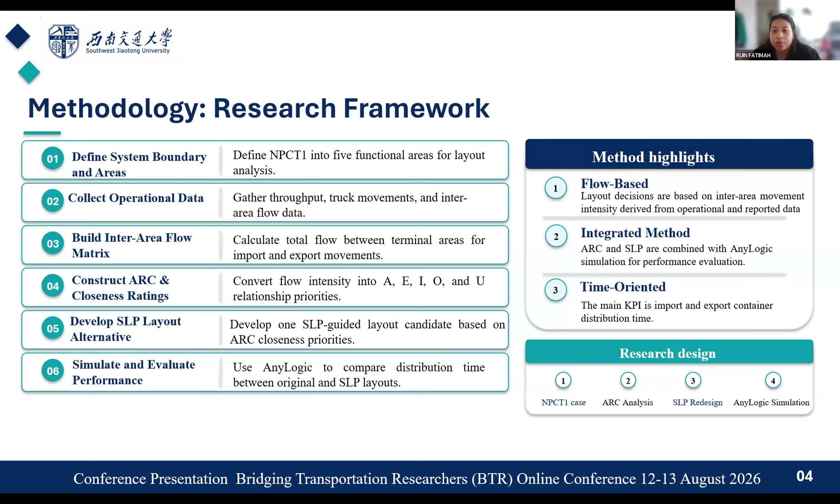The study focused on the terminal layout, inter-area movement, and time-based performance. It does not redesign the entire port system, but focuses on how the arrangement of key terminal areas can influence container movement.

This study has three contributions. First, the applied decision support contribution is the combination of flow-based ARC, SLP guide, and AnyLogic simulation into a traceable workflow.

This explains the analytic logic of the study. The process begins with operational flow data, including throughput data, truck trips, and inter-area flow in Jakarta Port. Then after we get the ARC, the important step is deciding the layout with logic.

In other words, the layout is not changed by intuition, but based on the strength of operational relationships.

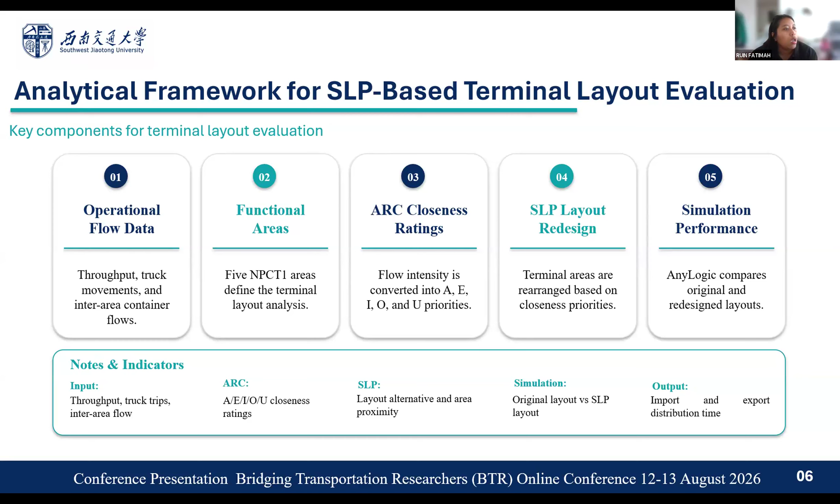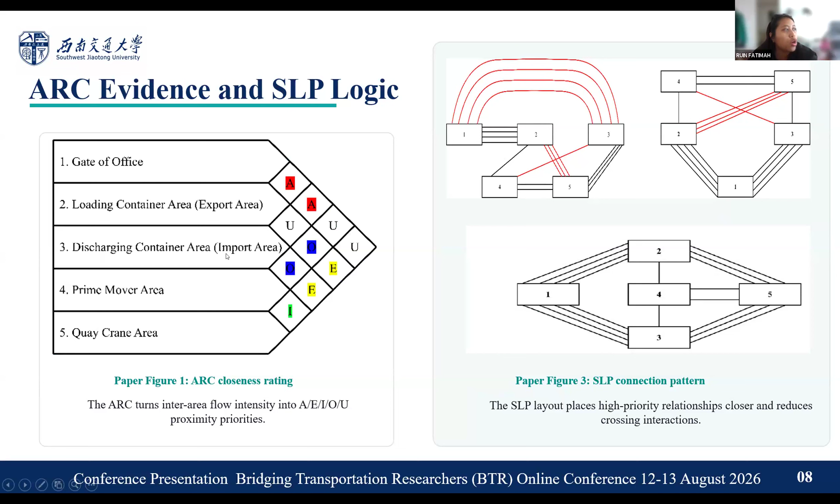Redesign aims to place high flow and high priority areas optimally. If we look at this, I have areas 1 through 5: 1 is the office, 2 is the export area, 3 is import, etc. For the prime mover area, this is simply about moving the prime mover area so we can see how distribution time becomes more efficient.

After I changed the layout from the original to SLP and applied it in AnyLogic, we can see the distribution time from the original layout. For import, they made a reduction of 18.85%. Also for export, this was 33.6%.

This result indicates that the redesigned layout can improve time-based terminal performance. The improvement is stronger for export movement, which suggests that export flow may be more sensitive to spatial arrangement in this case.

So this is the discussion. The findings have several practical implications, but these should be interpreted as case-specific results rather than a general prescription for all terminals. Operationally, the SLP layout helps improve proximity between high flow areas.

This can reduce unnecessary internal movement and support smoother container distribution. From a managerial perspective, the framework can support evidence-based decision-making for terminal managers using operational flow data, ARC analysis, and SLP redesign. This study also has wider relevance for terminal planning, port, and development.

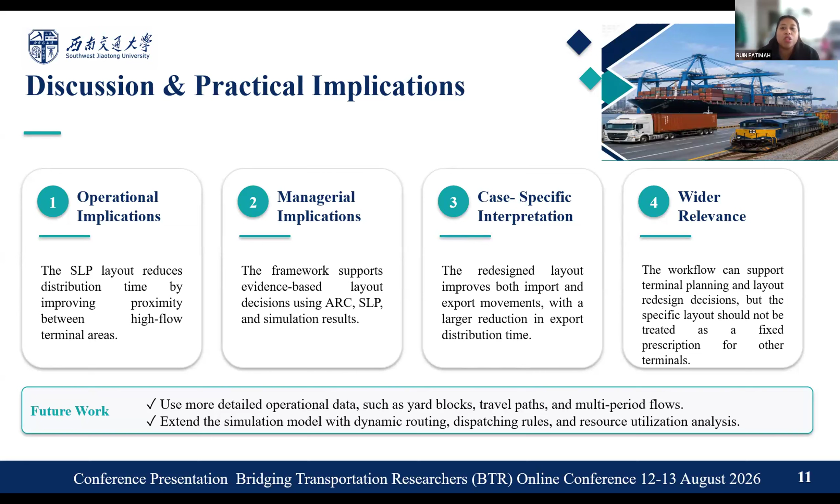However, future research can improve the model by using more detailed operational data, such as yard blocks, actual travel path, and multi-period flow data.

To conclude, this study integrates ARC, systematic layout planning, and AnyLogic simulation to evaluate redesign at Jakarta Port. The results show the SLP developed layout can reduce distribution time.

For import it is 18.85%, and for export 33.6%. This suggests layout planning can provide practical decision support for terminals, while the redesigned layout should be understood as one improved candidate, because the case study is just in Jakarta Port, we cannot say it will work the same in other terminals.

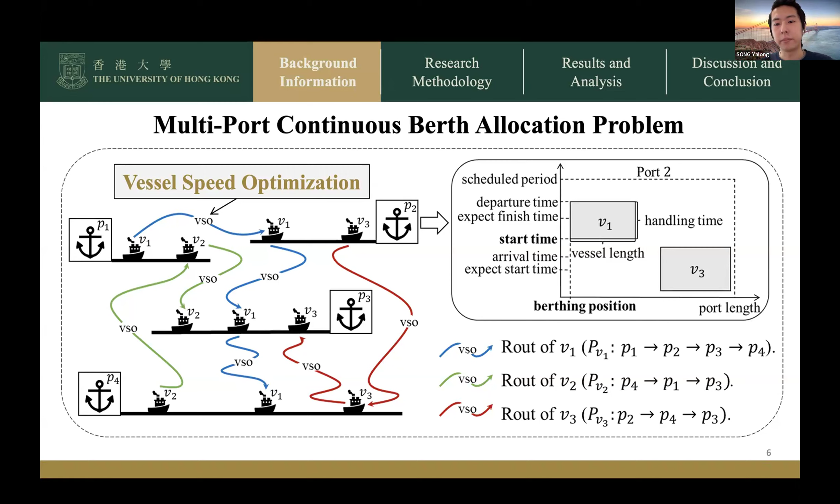I also follow some assumptions in this work. First, we assume the handling time is fixed as a parameter. Second, we consider the hard operation start time window as well as the soft operation end time window. The delay will incur penalties, which will further reflect in the objective.

Third, we consider the discretization of the speeds. All the vessel speed optimization will select a speed in a given range. Finally, the safety margins and the draft depths are assumed to be satisfied.

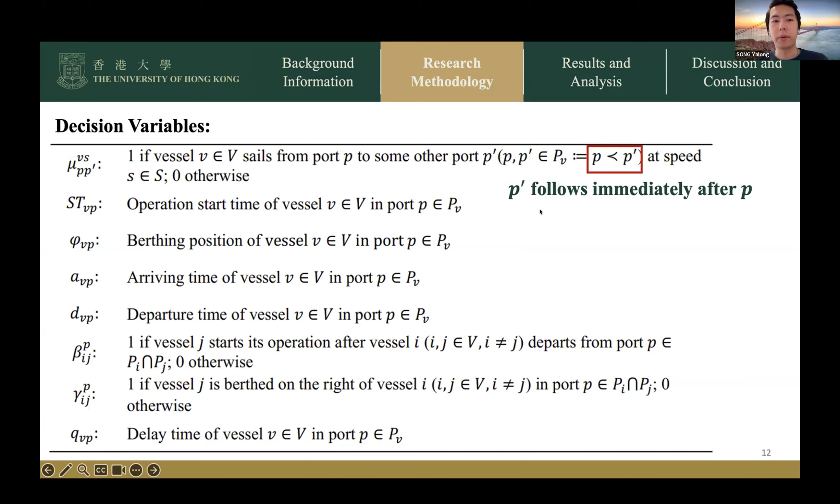Based on these problem descriptions, we propose some methodology here. Here are some size parameters and decision variables used in the formulation. We just quickly see them, and the symbol of precedence means the port P prime follows immediately after port P, which will be used in the following model.

We formulate this problem as a mixed integer linear programming model. The objective is to minimize the cost for the whole system, which includes three parts: the vessel waiting cost, the penalty for delay, and the fuel consumption.

For the constraints, 2 to 5 are relevant to the vessel time windows, and constraints 6 to 8 prevent any two vessels from having conflicts in the same port.

We also give a diagram to show the expression for these constraints. The beta and the gamma are decision variables for the temporal and spatial relationships between any two vessels.

We allow at most one overlap in either space or time, just like the situations shown in picture A and picture B. Both of them are feasible. However, in picture C, if we cannot define any gap in both space and time, this means that there is an overlap between the two vessels, and all the decision variables must be 0.

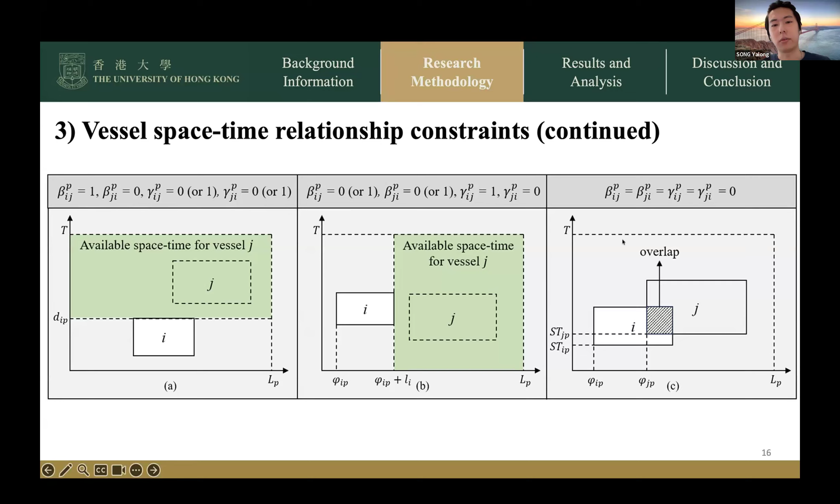Constraint 9 further ensures the vessel berths inside the ports, and constraints 10 to 12 ensure operation continuity in time, where constraint 12 assumes that the speeds between any two ports are constant. The last one, the scheduling period constraint, ensures the end time for each vessel must be before the scheduled period.

The removal and insertion operators are designed according to the problem characteristics. Moreover, we also introduced a neighborhood solution generation operation to explore broader neighborhoods for the solutions.

In this algorithm, we also consider a constraint relaxation mechanism. We first relax constraint 13, which is the scheduling period constraint, in the initial solution generation, and further reprocess the violations in the removal operation.

We also relax constraints 6 to 8, which are the non-overlapping constraints, in the insertion operation, and finally remove the conflicts caused by the relaxation in the newly introduced neighborhood solution generation operation. Finally, we can get a new feasible solution. That's all of the framework of the ALNS algorithm.

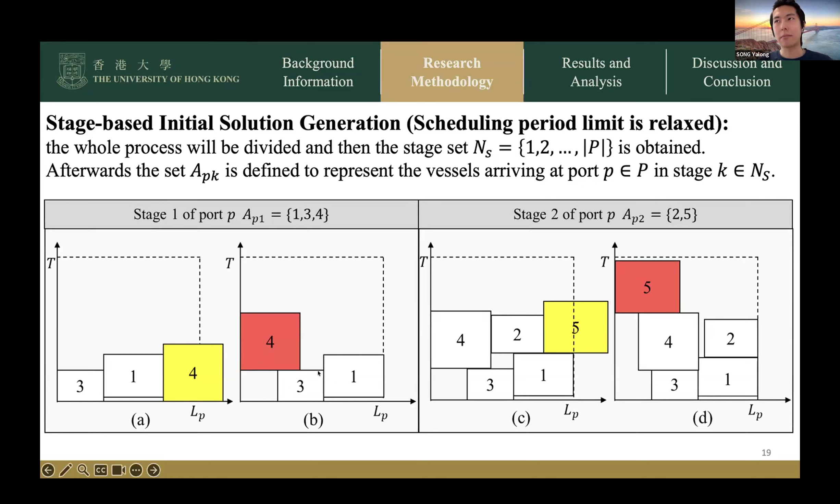As shown in picture A, once a vessel exceeds the port length, we mark and remove it temporarily, and further push out the unmarked vessel to the rightmost positions in this port, like picture B, and reallocate the marked vessel to the leftmost position in this port, as well as postponing the start time of the vessel to avoid any conflicts with other vessels. This is the steps for the stage. Repeat these steps in each stage, and we can get an initial solution.

In case we relax the scheduling period constraint in the initial solution generation, we need to remove the violated vessels in the removal operation first, and the others are removed according to the selected operators as follows, including the random remove, bit-based remove, cell-based remove, and delay-based remove. The second and third ones follow the criteria about the waiting cost and average speed.

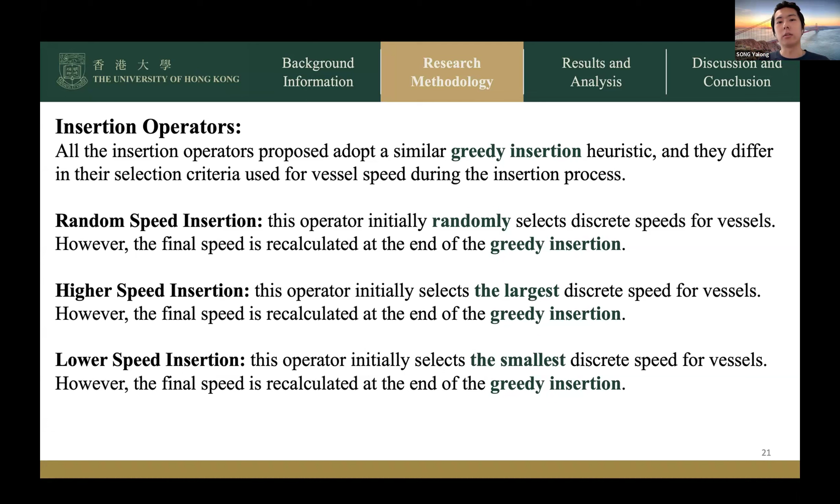We repair it in the insertion operation. We propose 3 operators to decide the initial speed for the vessels to insert, including the random speed, higher speed, and lower speed insertion operators. After deciding the initial speed of each vessel, we can calculate the arrival time of the vessel at the current port, and we apply the similar greedy insertion heuristic to get the assignment for the vessel. After that, we recalculate the actual speed for the vessel according to the results of the assignment. I will show the greedy insertion heuristic using the example below.

We try to insert the vessel v, marked in yellow, into the current plan in this part. We first calculate the arrival time of vessel v based on the selected operator, and considering the expected start time of vessel v, we can define the earliest start time of vessel v, which is the value of the red line min. This value plus the handling time gives us the value of max. These two red lines bound the insertion period for this vessel, and we mark the vessel operating within this period in blue, and further eliminate the spaces occupied by these marked vessels to get the green areas, which are the available areas for insertion, like picture A.

In picture B, we shift this period and can find a feasible position for the vessel to insert, like picture C. We try to insert all the vessels into a feasible position. However, when no strict feasible region can be found, the vessel will be put on the position that doesn't exceed the scheduled period and has the minimal conflict with other vessels. This is because we relax the non-overlapping constraints in the insertion, as I talked about before, and the conflicts will be further eliminated in the next process.

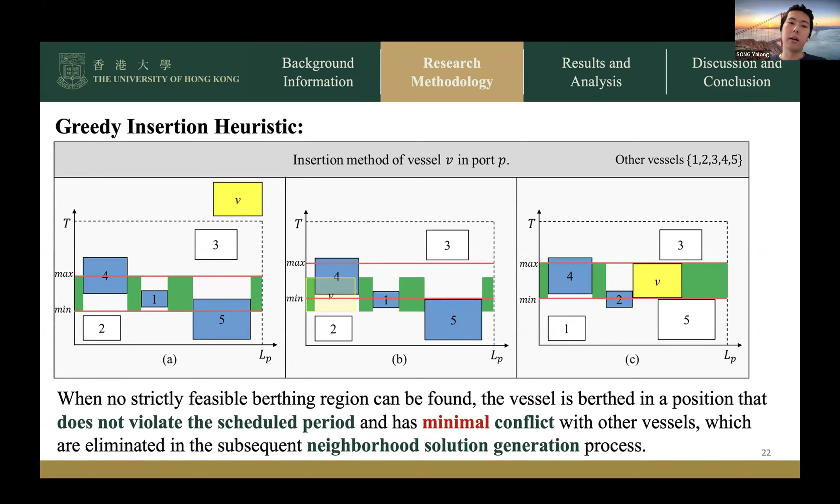We first push vessel 1 to the right to eliminate the overlap. If it's feasible, we end the operator. However, if vessel 1 exceeds the port length, we then push it up to find a feasible position. This is the meaning of the sequence of the 2 movements in each operator.

We need to eliminate all the overlaps caused by the relaxation in the insertion operation, and then we can get a feasible solution. Okay, that's all of the key procedures in the proposed algorithm. We further show some numerical experiment results.

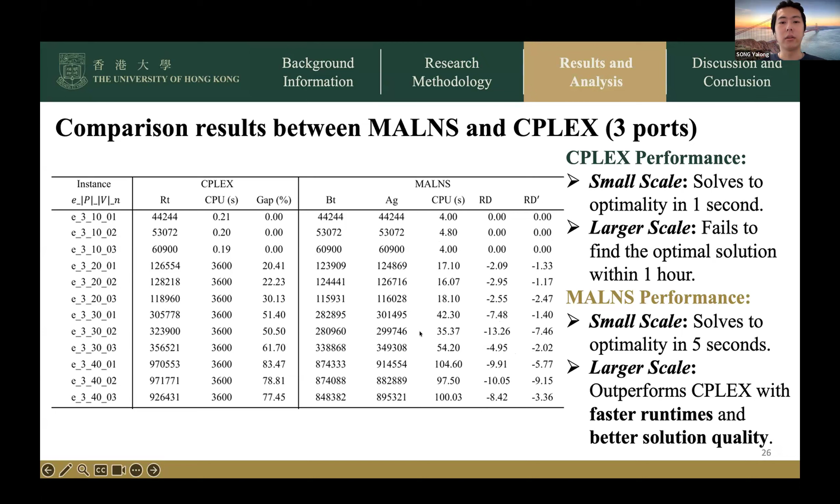By contrast, the MALNS outperforms CPLEX with larger scale instances regarding a faster runtime and better solution quality, which are shown in the last 3 columns in this table. We run MALNS 30 times for each instance, and the average solution and solving time are the average values for the 30 results. And then here are the results for the instance with 4 ports.

These instances cover a broader range of vessel numbers. For the small and medium scale instances with 10 to 70 vessels, we can get the same conclusion as the instance with three ports. For the large-scale instances with 80 and 90 vessels, CPLEX cannot find any feasible solution within 1 hour.

By contrast, the MALNS also can get the feasible solution within a reasonable solving time, from 5 minutes to 7 minutes. Okay, that's all of the main contents of this paper, and we will give some discussion.

For the limitations of this paper, we just consider a deterministic scenario, including the handling times and the sailing conditions. We also assume a strong cooperation among parties involved in the maritime transportation, which may be challenging in practice. And we also consider a constant sailing speed, ignoring the real-time dynamic adjustments of the speed.

For the future work, the future work can incorporate uncertainty for this problem by applying stochastic or dynamic programming. And it's also worth exploring the enhanced heuristic with advanced strategies.

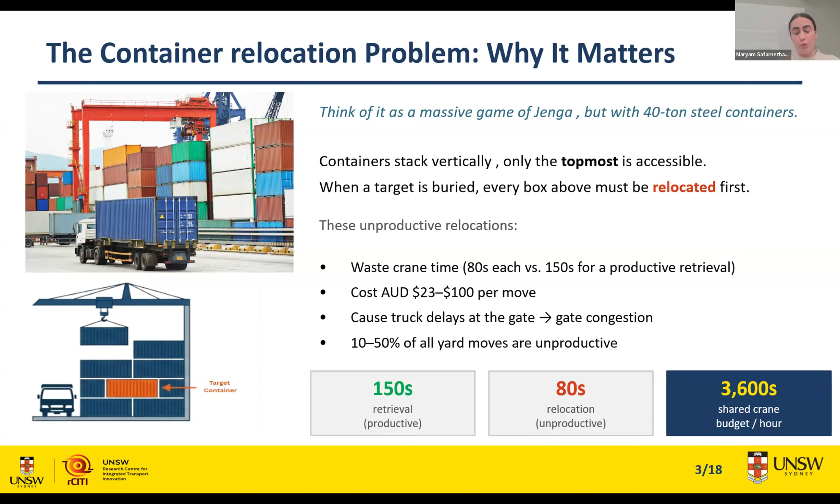So the container relocation problem basically tries to answer this simple question: how can we retrieve all containers while minimizing the number of relocations, basically focusing on crane efficiency? Traditionally, this problem is approached as a single objective problem, and it's proven to be NP-hard.

But if you look at container movement operations, we can understand that container retrieval and truck arrivals are interconnected. So focusing on one of them solely would lead to suboptimal decisions. On one hand, we have port operators who want to maximize crane efficiency, so they might wait until something called natural exposure of the container, which means longer delays for some trucks.

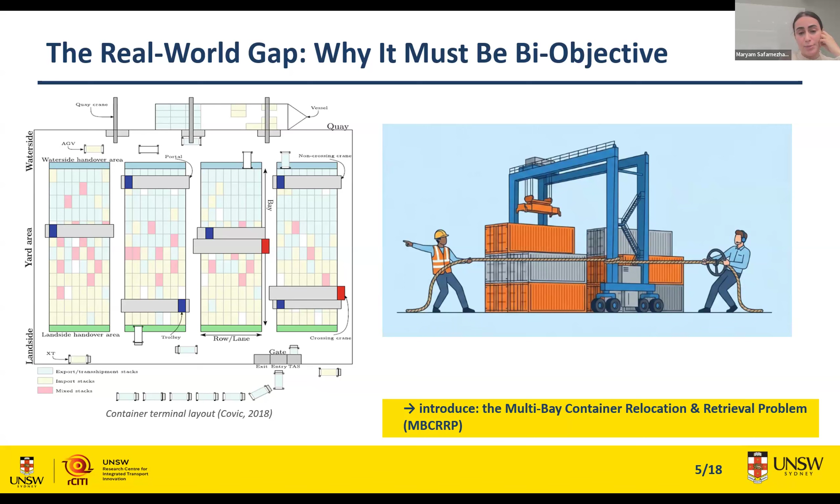On the other hand, are truck companies whose trucks cannot wait for a long time. But if we only focus on service level for the trucks, then the yard might have to do so many relocations. So these are basically two conflicting objectives, and that's why in my research I focus on joint optimization, trying to minimize crane movement, or relocations, while also minimizing the deviation from the schedule for the trucks at the same time.

So they have to solve each problem instance from scratch, and obviously that's not applicable in a highly dynamic environment of container terminals. That's why there has been a growing shift toward learning-based approaches and basically reinforcement learning. But as far as we're concerned, there hasn't been any work considering bi-objective CRP and applying multi-objective reinforcement learning on that. So that leads us to a clear gap, and that's the framework that my research would address.

But why choosing reinforcement learning? Reinforcement learning is a very good fit for sequential decision-making problems, and CRP is inherently a sequential decision problem. So every action and decision that we make now would actually affect future actions.

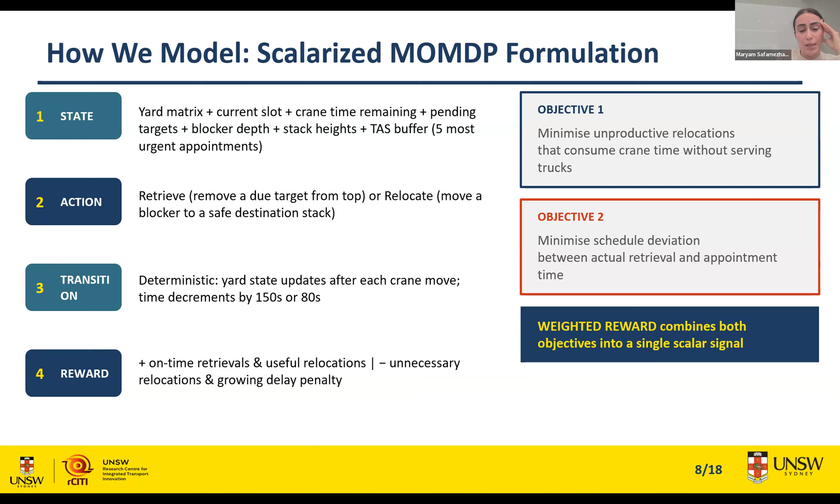In order to factor in the truck appointment schedules, I've used two priority labels. The first one is static priority labels: 0 for overdue containers from the previous day, 1 for targets planned to leave today, and 2+ for future stock. We also have a dynamic priority label that would change based on the remaining time to retrieval. This gives a general vocabulary for the agent to use based on different yard configurations, and also gives the agent the information needed on when to retrieve a container.

Standard Q-learning uses a limited time horizon, but here I'm using a rolling horizon training. The reason I'm doing this is that I want the agent to not only think about today's decisions, but also about the next day. So all the base features and state would be carried over to the next day, and that lets the agent have the freedom to learn a policy where, when the crane is idle, it actually does some pre-marshalling and prepares the yard for the next stage.

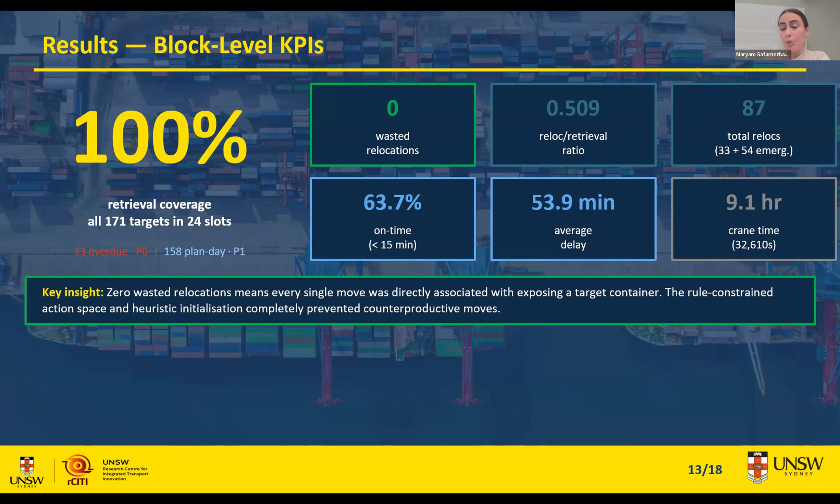After the agent is trained and learns a good policy, we evaluated its performance on unseen snapshots. As you can see, 100% coverage rate means all 171 target containers are retrieved, and we have a 0.5 relocation-to-retrieval ratio. So for every 2 retrievals, there's only 1 relocation, and 63% of all these target containers are retrieved on time, with an average delay of 53 minutes.

What that means for us is that multi-bay coordination is very complex compared to what we see in literature with single bay. That's why I also tried to consider multi-bay, because first of all it's closer to reality, and also having one crane shared between different bays makes the answers more optimal, not sub-optimal.

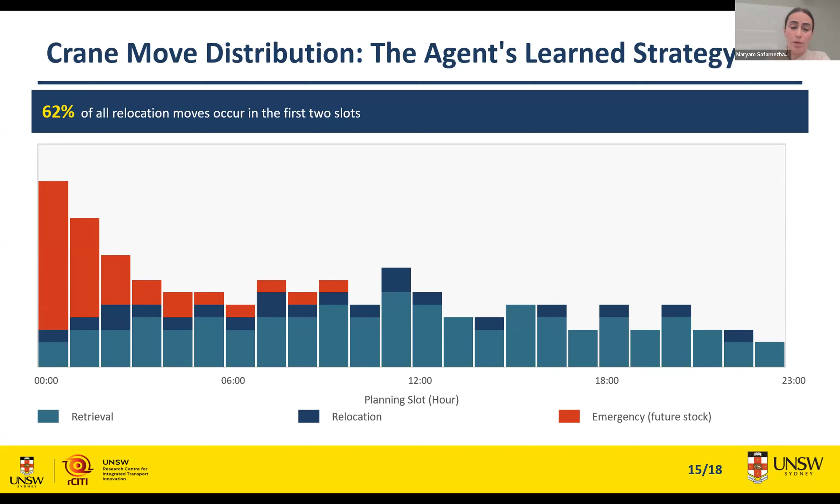If we look at this bar chart of crane movement distribution, we can see the agent actually learns a good policy. 62% of all relocations happen in the first 2 time slots. This tells us the agent learned to relocate the blockers early when it has idle time in the night shifts, and then focus on retrieval as the day progresses. So clean early and retrieve all day is the policy the agent learned, and that's what we expected.

So what this result tells us is that 100% coverage rate and 0.5 relocation-to-retrieval ratio show that the agent is trained and the heuristics are doing their work. But we have only 63% on-time retrieval.

One reason for this is related to the one crane being shared between multiple bays. The other is that we are trying to extract very specific features from the yard to show the agent how to make more generalized decisions and apply them to different yard configurations. But because of the limitations of tabular Q-learning, the Q-hit rate is not very high—here it's about 51%. Other times it falls back into the heuristic.

That's why in future steps I'm looking to replace tabular Q-learning with deep reinforcement learning, which would be better suited for the larger state space and could also make more general decisions. Thank you everyone for listening, and I'm happy to answer any questions.

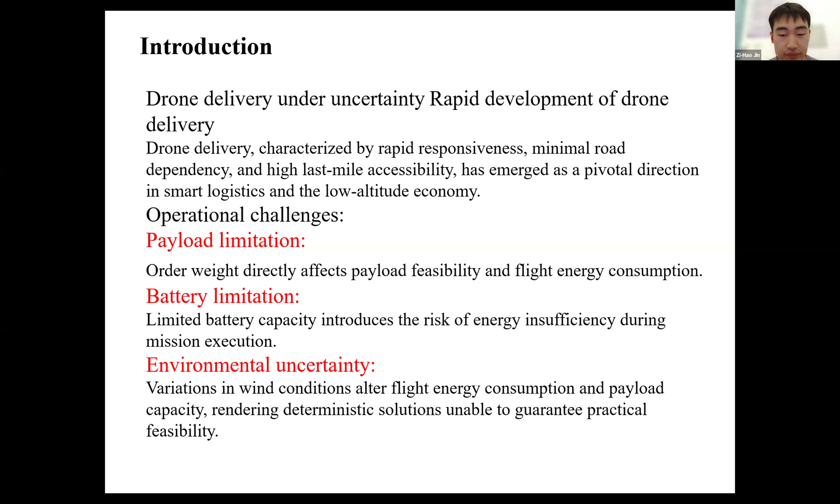And how to ensure reliable drone delivery decisions under uncertain payload and windy conditions.

In this system, there are a depot and some drones. Drones depart from the distribution center, return to the depot after serving customers, and then proceed to the next mission and battery replacement.

Therefore, the objective of the paper is to design a reliable drone delivery scheduling strategy under uncertainty, minimizing system operating costs while ensuring robust feasibility of the solution. We want to develop a reliable drone delivery scheduling strategy that minimizes operational costs while maintaining feasibility under uncertain payload and windy conditions.

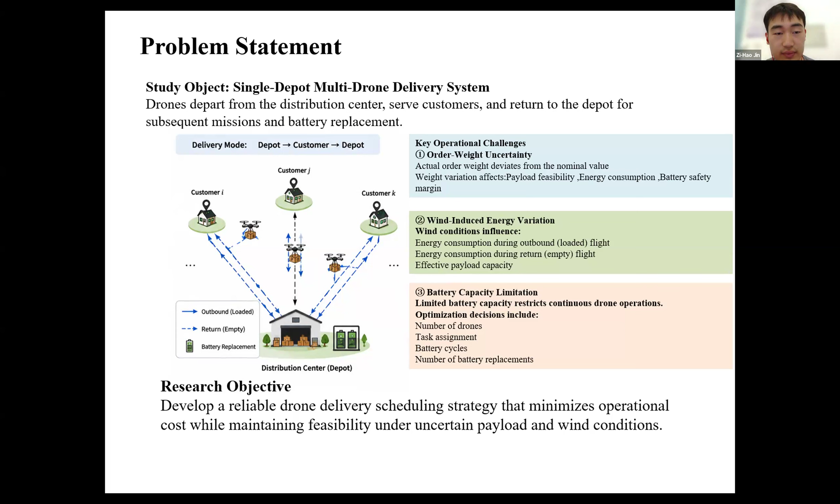And I will now introduce the robust optimization model established in this paper. Due to the presence of order weight fluctuation and windy condition variance in drone delivery, if we directly adopted a deterministic model that only considers predicted weights and average environmental conditions, two problems will arise in actual operations: increased order weight may cause the drone to exceed its maximum payload, and actual energy consumption may exceed the predicted value, resulting in insufficient battery power during flight. Therefore, this paper proposes robust optimization to explicitly incorporate uncertain factors into the model.

The overall model adopts the classical two-level min-max robust optimization structure. This formula consists of two optimization levels. In the outer layer, the decision maker performs the system planning: decides which drones to activate, which drone serves each customer, which battery cycle to use, and how many battery swaps are needed. In short, the outer level answers how the system should plan delivery schemes in advance, considering future uncertainties.

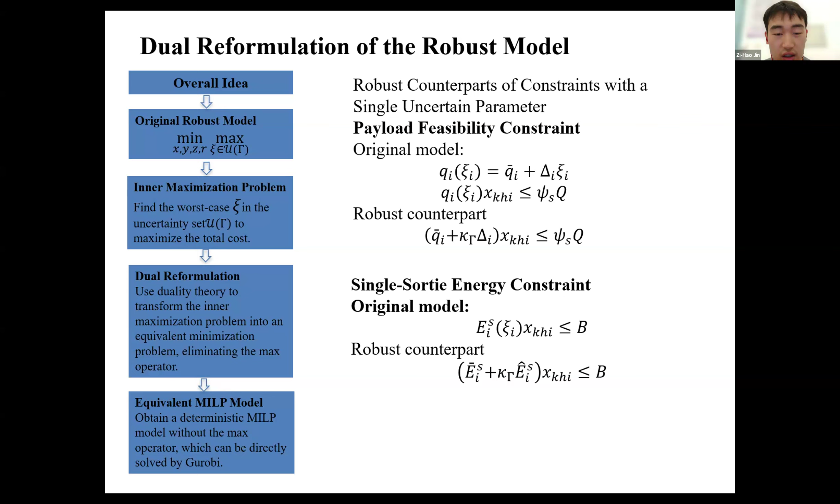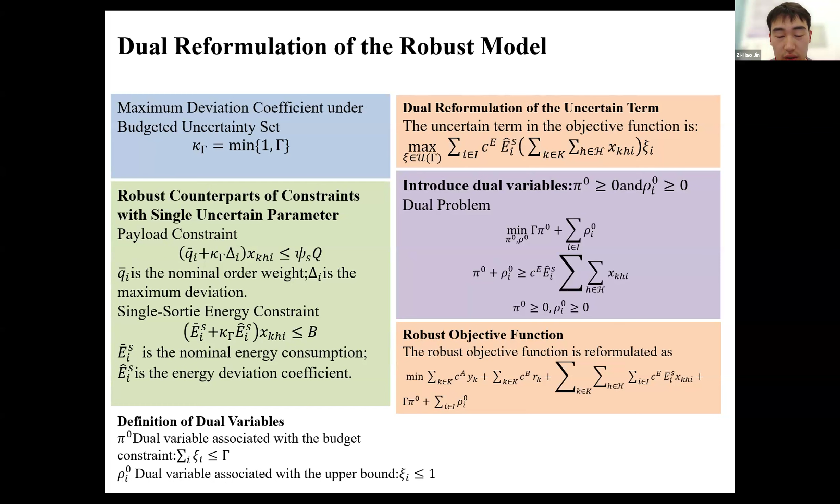And the objective now becomes deterministic, no longer contains max, and can be directly solved by Gurobi. And finally, for the complete energy constraint, we get the origin uncertain term converted to this dual problem, which can also be directly solved by Gurobi.

I will now present the experimental results. First, the experimental environment and parameter settings, then cost variations under different robustness levels and out-of-sample relative performance. The experiments verify two questions.

Can robust optimization improve reliability under uncertainty? Is the additional cost acceptable?

We set the robustness budget setting to five numbers. As gamma increases, the model considers more disruptions, improving reliability but increasing objective cost due to more energy and battery swap resources.

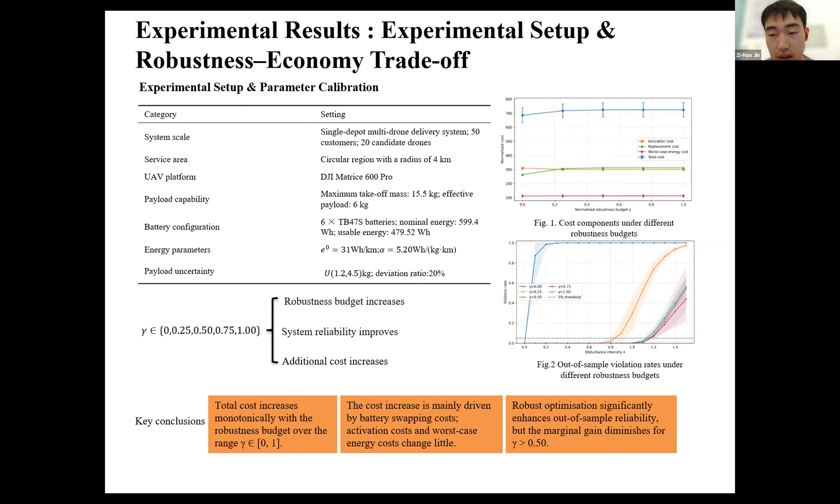After determining a reasonable robustness level, this section further analyzes the impact of two main uncertain factors: order weight uncertainty and wind condition variation on system goals.

713. Cost increase mainly comes from additional battery swap demand, because heavier orders lead to higher flight energy use, lower remaining capacity, and more frequent swaps.

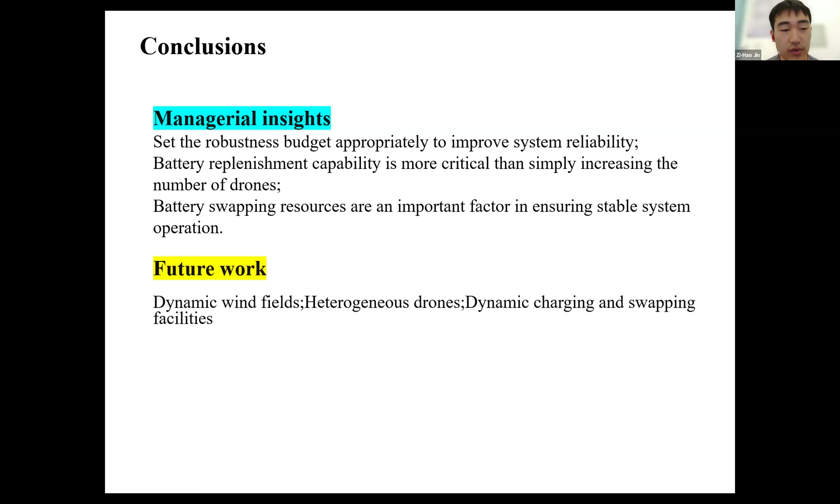Future work should consider dynamic wind fields, heterogeneous drones, or dynamic charging and swapping facilities. Thank you for your attention.

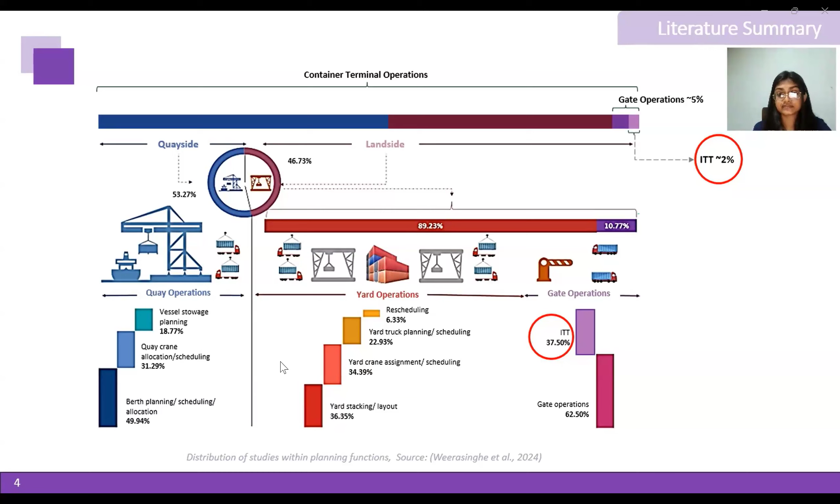Based on the literature review, we identified two main research gaps and objectives. The first research gap is the lack of system-level representation of ITT automation. Existing research has mainly focused on automation at individual terminals or specific technological and operational aspects. Although interterminal trucking is recognized as an important part of port operations, there is still limited understanding of ITT automation from a multi-terminal system perspective. Especially the key variables influencing automation and the causal relationship among them have not been systematically represented. Therefore, there is a need to identify these variables and understand how they collectively influence ITT automation. So based on this first research gap, I developed my first research objective: to identify the key variables and causal relationships governing ITT automation within a multi-terminal port system.

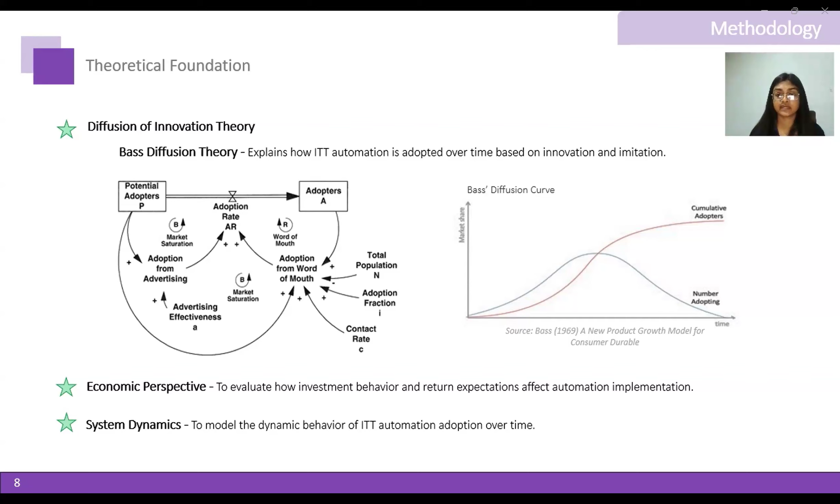This is the data collection part. We use secondary data sources such as peer-reviewed academic literature, industry reports, and publicly available data to develop the causal loop diagram and identify key variables. We also use expert insights, interviewing several experts from the Port of Colombo to help develop and validate the causal loop diagram.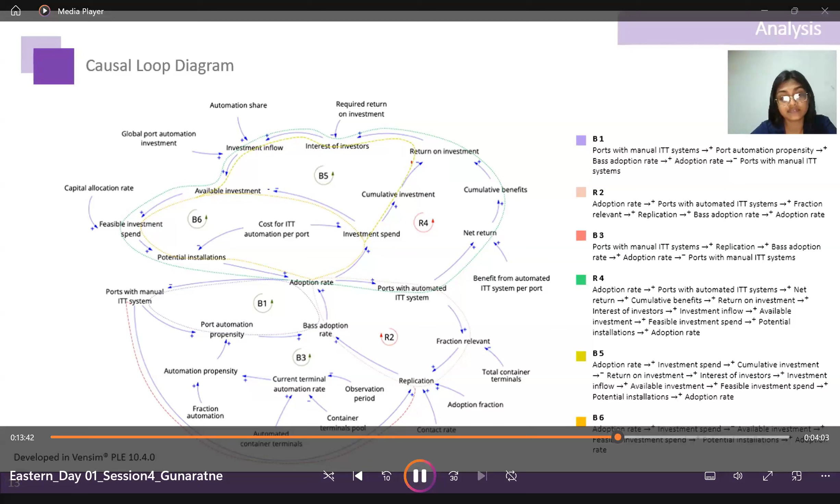If we take the R4 loop, it is also a reinforcing loop, which introduces the economic side of the model. When ports adopt automation, they can achieve operational benefits such as improved efficiency and lower operating cost. These benefits can improve the return on investment, and a better return makes automation more attractive to investors, increasing investment inflow. When more investment becomes available, more ports can implement automation, so again we have a reinforcing effect.

If we take the B6 loop, it is a balancing loop representing the investment capacity constraint. Automation requires financial resources, so as more ports adopt automation, more of the available investment capacity is used. As the remaining investment capacity decreases, fewer additional automation projects can be supported, which slows down the adoption rate. This is essentially a resource constraint: adoption requires investment, but investment capacity is not unlimited. So we can see that ITT automation is not a linear process; there are forces pushing adoption forward and forces that slow it down.

Here you can see the stock and flow diagram we developed. Basically, the stock and flow diagram converts these relationships into a simulatable structure. We have two main stocks, ports with manual ITT systems and ports with automated ITT systems, linked through the adoption rate flow. Other than that, we have three more stocks: cumulative automation benefits, cumulative automation investment, and available investment. We have identified the mathematical relationships between these variables.

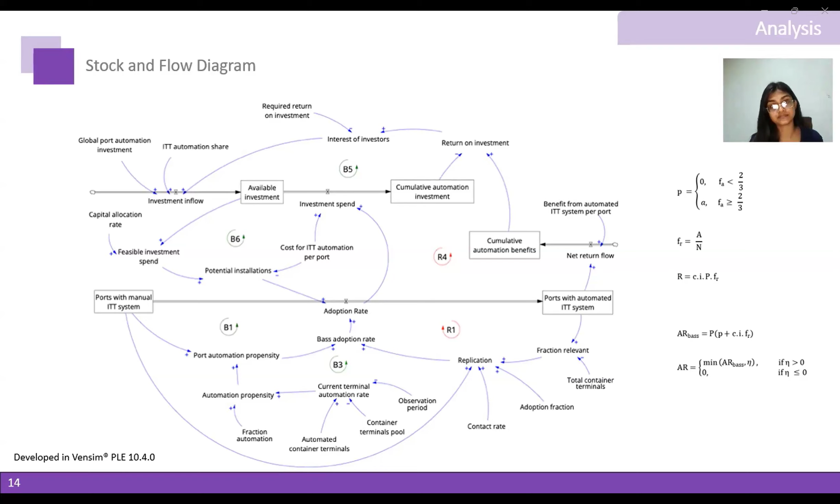To conclude, this study developed a system dynamics framework to understand the adoption of ITT automation, grounded in the diffusion of innovation theory. This model identifies three key mechanisms driving adoption: innovation, imitation, and economic investment.

Especially the imitation through interactions between ports can reinforce adoption and accelerate this diffusion. However, adoption is not driven by behavioral pressure alone. Economic feasibility plays a critical role in determining how quickly this automation adoption can actually be implemented. Overall, this study provides a conceptual foundation for future simulation-based analysis of different ITT automation strategies and investment scenarios.

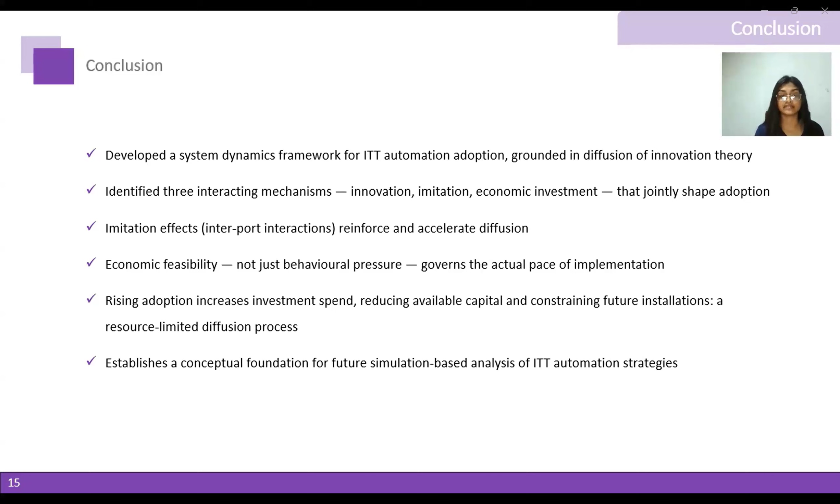Moving to the limitations and future directions, there are two main limitations. First, the validation of the model was mainly based on expert insight from the Port of Colombo, so validating it with experts from other multi-terminal ports would help improve the reliability and generalizability of these findings. The second is that this is a global level diffusion model, so it focuses on how ports influence each other across the wider system, rather than representing the situation at any single port in detail.

All right, so I noticed that we have Nikeshala with us. Nikeshala, very great presentation. I'm actually glad that we have the recording because we are running out of time, and I also have to replay another presentation. I have a few questions that I will post in the chat box, and I encourage everyone to do the same.

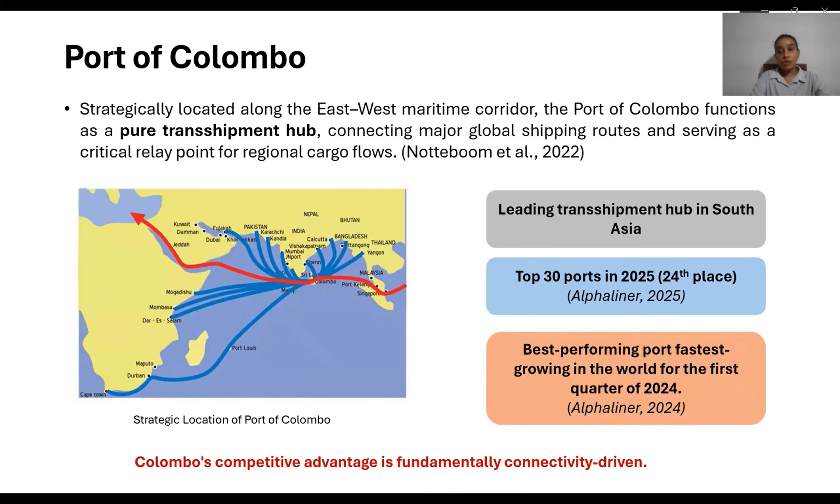Given that connectivity is Colombo's core strength, you would expect its infrastructure to keep pace, but that's not quite the reality, and this is where the problem starts. Several critical infrastructure projects at Colombo have suffered multi-year delays. For example, the ECT, CWIT, and JCT have all experienced delays between their planned and actual expected completion timelines.

So the pattern here is clear: delay is not the exception at Colombo, it's close to the norm. And these delays are not just administrative footnotes, they carry a real economic cost, which brings us to the next point.

In the port industry, timing defines competitiveness. Late capacity expansions, even when eventually completed, result in loss in cargo, reduced competitiveness, and even weaken the hub status. At the same time, existing terminals are forced to operate beyond their design capacity, which compels operators to modify how they run operations, increasing congestion and operational strains.

To put a number on this, Sri Lanka Ports Authority has lost over $50 million annually because of this 5-year delay in operationalizing the ECT terminal alone.

So delays not just cost time, they cost tens of millions of dollars a year, and they erode the very connectivity advantage that makes the Port of Colombo competitive in the first place.

Now if delays were simply a local execution issue, the fix might be straightforward: build faster. But the challenge is bigger than that, because the entire global maritime landscape is shifting under these ports' feet.

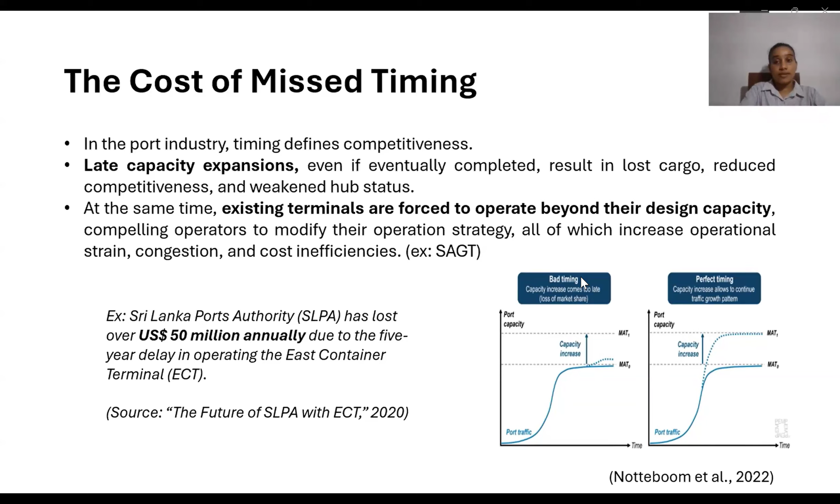Even when expansion projects do stay on schedule, global maritime dynamics are advancing far faster than port infrastructure timelines can match. This creates a widening gap, both temporal and strategic, between market demand and port readiness. Importantly, this gap is largely uncontrollable and inevitable, yet it's critical to address.

Here I have mentioned some of the global trends driving this. So ports aren't just racing against their own construction timelines, they are racing against a moving target. This sets up a clear strategic gap for Colombo especially.

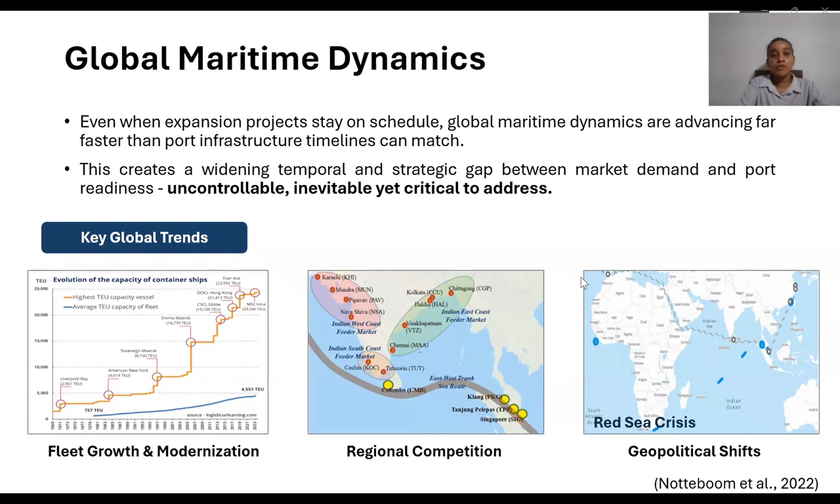Let's look at where this leaves the Port of Colombo strategically. Colombo's stated vision is to be ranked among the top 15 busiest container ports in the world, but the reality is repeated capacity delays and rising competitive pressures from other regional ports. Between vision and reality sits a clear gap, and closing this gap is exactly the motivation for this research.

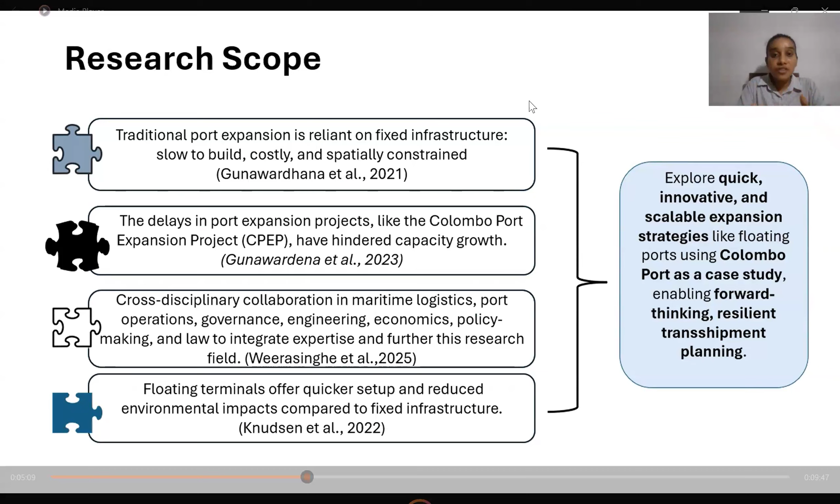When it comes to the research scope, existing approaches mainly focus on fixed large-scale infrastructure. What is less explored is how Colombo could use quick, flexible, and scalable alternatives to bridge the period between immediate demand and long-term infrastructure delivery. With that scope defined, let me now turn to specific research questions and objectives that guided this study.

When it comes to methodology selection, expansion is a complex decision because there is no single criterion that determines the best alternative. Many criteria matter: cost, time, technical feasibility, and many more. We therefore compared several methodological approaches and selected the MCDM method because it allows us to compare multiple alternatives across multiple, potentially conflicting criteria, while incorporating both quantitative and qualitative judgment.

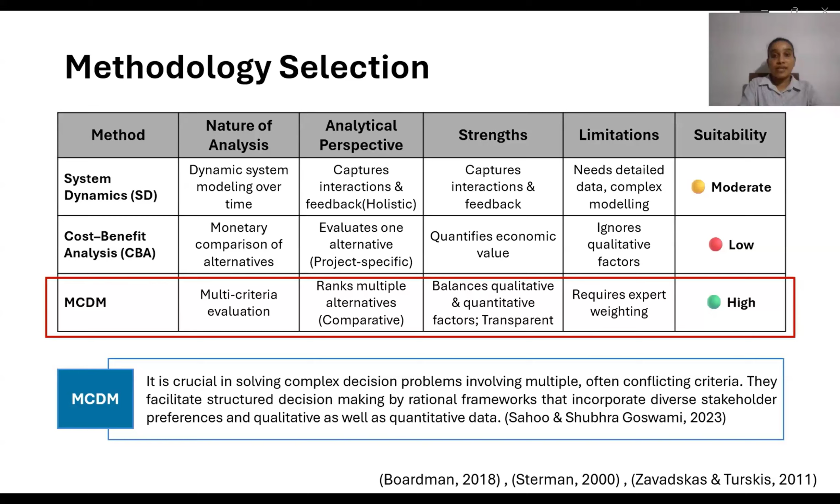Let's start with how data was collected. We used 2 complementary data streams. The first was literature and document review, and the second was semi-structured expert interviews involving professionals with experience in vessel and berth planning, terminal operations, engineering management, and strategic policy decision making. The literature therefore provided the evidence base, while the experts helped translate that evidence into decision-making assessments.

Based on this evidence, 3 strategic alternatives were evaluated. These are the identified expansion strategies: traditional expansions, floating solutions, and inland depots. Let me define each of these more precisely.

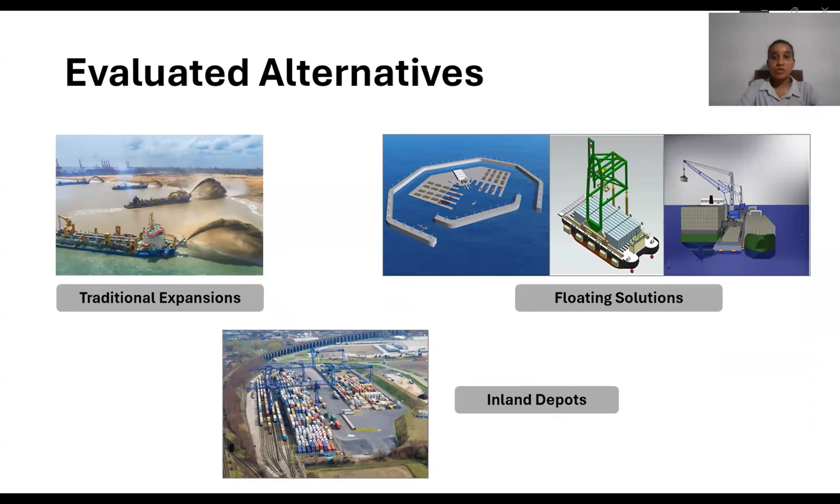The first alternative was traditional fixed expansions, representing long-term infrastructure such as new berths, terminals, reclamation, and dredging. The second was floating or modular infrastructure, which represents rapid and scalable capacity deployment. And the third was inland dry ports, which primarily enhance land-side capacity through inland storage.

Having defined these 3 alternatives, the next question is: what criteria should we use to evaluate them against each other? Four evaluation criteria were selected, each identified from the literature and validated through expert consultations to ensure relevance to the strategic port expansion decisions. These criteria are deployment time, cost, technical feasibility, and environmental impact.

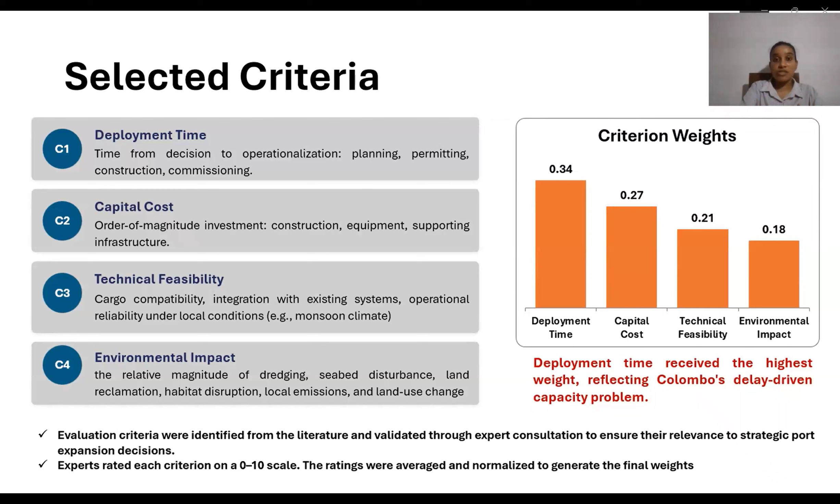That process happened in 5 stages: first, expert elicitation, then fuzzy conversion, aggregation, normalization, and then the decision matrix, which fed directly into the MCDM analysis. Now let's look at what that decision matrix actually contained.

For example, lower deployment time and lower capital cost are preferable, whereas higher technical feasibility is treated according to its defined preference direction. Indicative ranges from the literature were also used to define and check the experts' assessments.

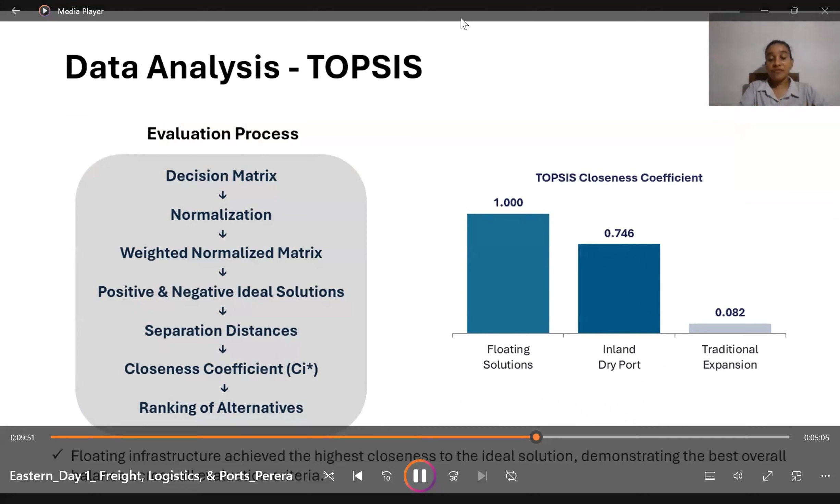The most important result is the consistency between the two MCDM methods. Both TOPSIS and BWM identify floating or modular infrastructure as the highest performing alternative, followed by inland dry ports, while traditional expansion ranks lowest under the evaluated criteria. This consistency is important because the result is not dependent on a single decision-making technique.

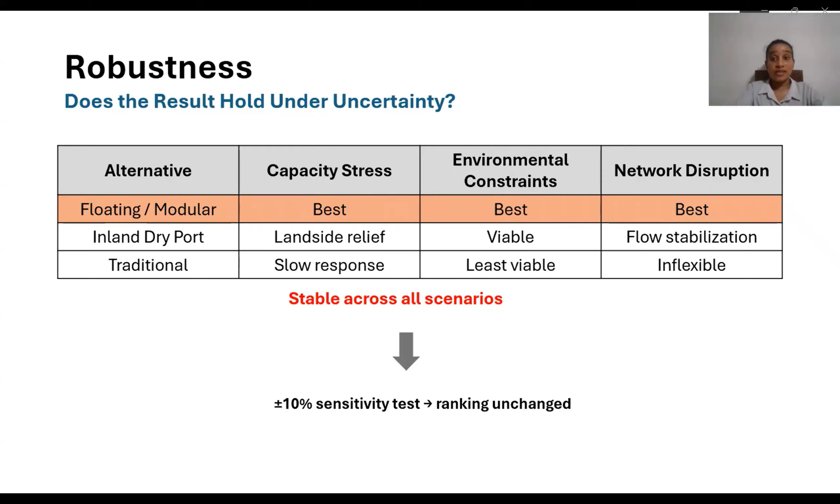Then we did a scenario analysis to check whether these results hold under uncertainty. Next we come to the findings.

Four operational insights have emerged. First, berth capacity is a critical bottleneck, particularly under high berth occupancy and vessel bunching. This supports the role of floating infrastructure as a rapid seaside capacity option.

Second, land side capacity is also under pressure with high yard utilization. This creates a role for inland transport.

Third, infrastructure delivery is not keeping pace with the speed at which capacity pressure can emerge. Finally, these findings suggest that traditional expansion alone is insufficient as a short to medium-term response. Taken together, Colombo's challenge is not only insufficient capacity, but insufficient adaptability to changing maritime conditions.

Now let's check how these findings align with Colombo's own official master plan. Three points of alignment stand out. First, the South Port Max development requires phased implementation, so flexible solutions can provide bridging capacity during delays.

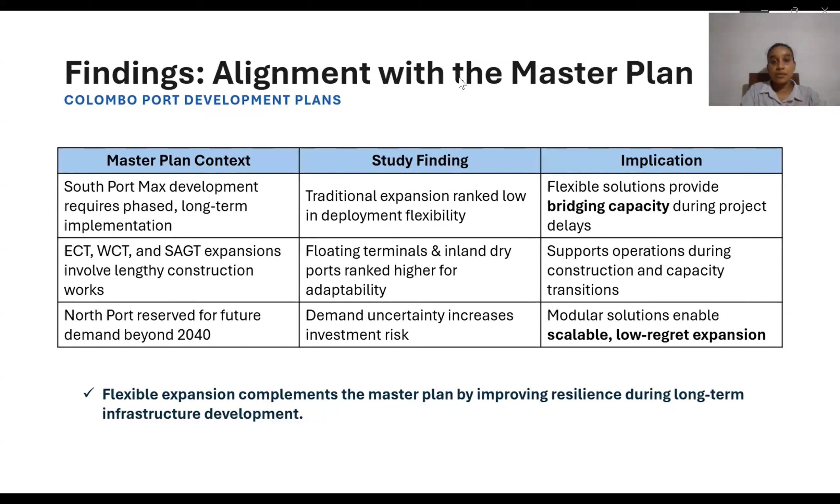Second, ECT, WCT, and SAGT expansions involve lengthy construction where floating terminals and inland dry ports can support operations during capacity transitions. Third, with North Port development planned for future demand beyond 2040, modular solutions provide scalable, low-regret capacity under uncertainty. Overall, flexible expansions complement rather than compete with the master plan, strengthening its resilience.

We benchmarked Colombo against regional port characteristics using CPPI trends from 2020 to 2024. Strong alignment is seen in South Asia and the Middle East, where capacity pressures, transshipment dependence, and disruptions favor flexible solutions. Alignment is more moderate or partial in East Asia, Europe, and North America, where efficiency, sustainability, and resilience are stronger priorities. Overall, the findings suggest that flexible expansion is context-dependent rather than one-size-fits-all.

In the discussion, what this research points to is a shift from a traditional paradigm to what I would call an adaptive port paradigm. The traditional approach emphasizes physical scale, large fixed terminals, long-term forecasting, permanent infrastructure, and maximum capacity.

The future-oriented approach instead emphasizes strategic flexibility, modular capacity, demand-responsive planning, and scalable solutions. In short, for transshipment hubs, competitiveness is shifting from how large a port is to how quickly a port can adapt. This conceptual shift has direct implications for policy and investment, which brings me to the next slide.

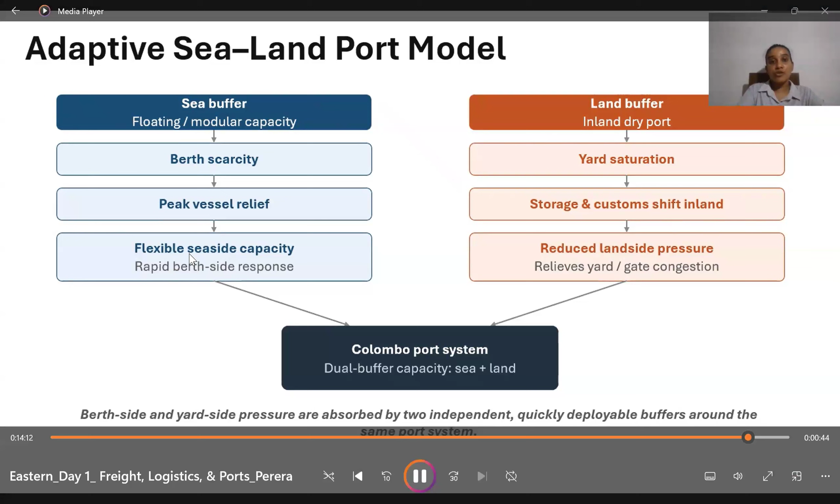In essence, this is a dual buffer capacity model. Berth side and yard side pressures are absorbed by two independent buffers around the same port system, rather than relying on a single point of expansion. These are the contributions of my study.

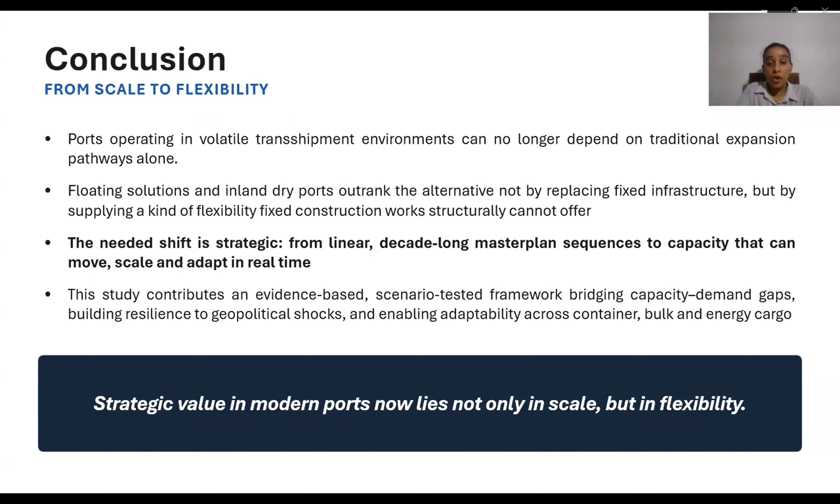To conclude, I would like to leave you with one central idea. What I want to say is, in modern ports, strategic value lies not only in scale, but increasingly in flexibility—the ability to adapt capacity to changing demand and uncertainty. That's about my presentation. Thank you for listening.

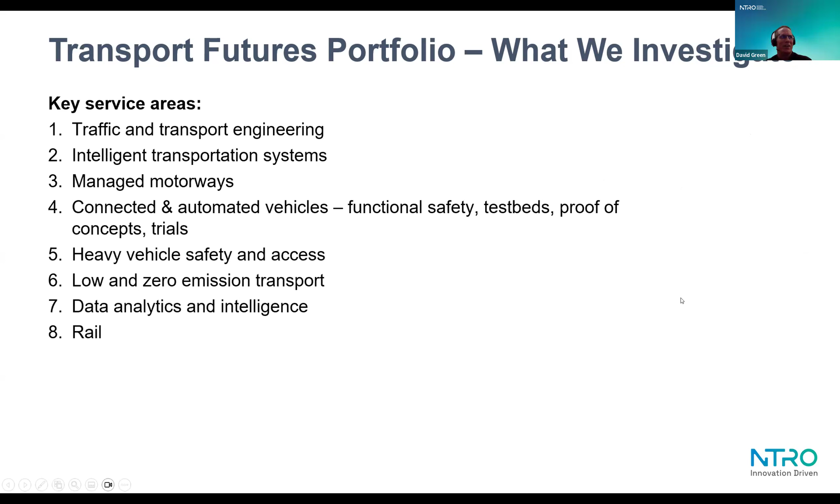A bit about Transport Futures - we're essentially investigating methods and policies to enable the safe, efficient, productive, and sustainable movement of people and goods now and into the future, across all transport modes, from cars and public transport to freight and personal mobility. We've got 8 service areas, which I'll go into more detail on, so I won't list them all now, but they're on your screen. We've got various key experts that work across our portfolio, with myself as the portfolio lead, Dr. Charles Karl as the national technical lead, Vivica Matthews providing strategic delivery advice, and experts in those various service areas. We've got a few of them here today to talk on some of their recent research.

A bit about the various service areas we deliver. Traffic and transport engineering - advice focused on safe and efficient movement of people and goods. Policy guidance aimed at optimising transport networks by aligning capacity with demand, maximising network efficiency, reliability, and overall performance. Then intelligent transport systems - advice on planning, implementing and managing intelligent transport systems and related assets, supporting the enablement of connected and automated vehicle operations, and guiding the deployment of ITS roadside infrastructure essential for a productive, increasingly CAV environment.

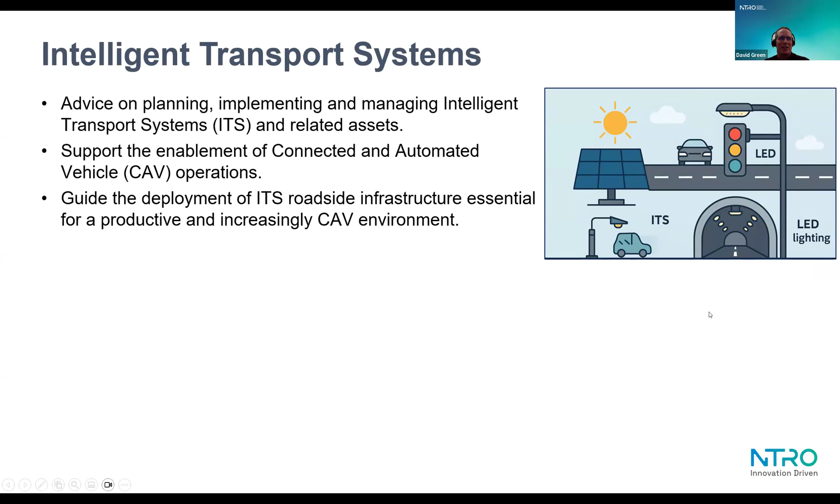Then managed motorways - we've got one of our key experts today, Dr. Hendrik de Linden, who will talk about this. That's leading the development of managed motorway practices across ANZ, providing advanced freeway capacity analysis and performance methodologies, and evaluating and optimising smart motorway designs to enhance network efficiency. Then connected and automated vehicles - we've got our expert, Dr. Ronny Kutadinata, talking today, around leading CAV trials including test beds and proof of concept deployments, developing safety cases, risk management and regulatory approvals, and designing and delivering research, testing and data-driven reporting.

We also work in the heavy vehicle safety and access space. We analyse heavy vehicle safety and access using advanced modelling and performance assessment, assess rollover risk, safe operating speeds and route suitability for high capacity vehicles, and apply load transfer ratios, simulation and performance-based standards methods with field testing to improve safety outcomes. We don't have a speaker today on that, but our expert in that space is Anthony Germanchuk.

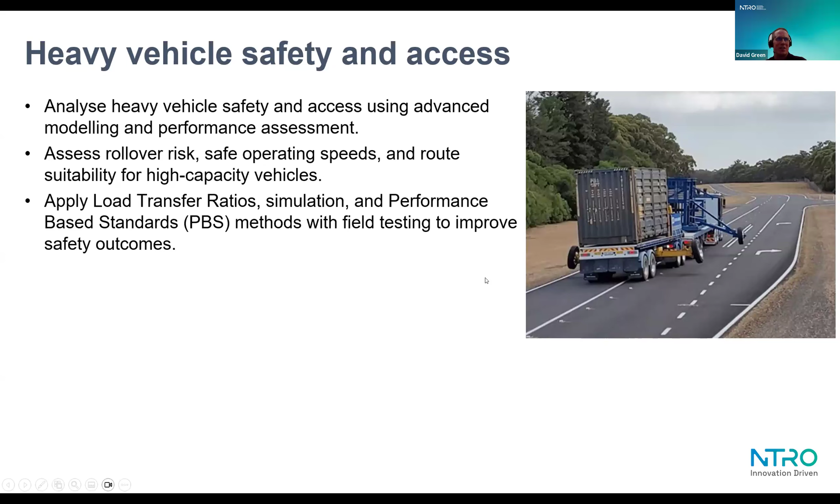Then we've got low and zero emission transport, and we've got a speaker today talking about that, Dr. Robert Cohan. We lead research and guidance to accelerate low and zero emission transport, contribute to and assess vehicle infrastructure safety and policy, including hydrogen, EVs, fire risk, pavements, accessibility, etc. Although we don't do the pavement work directly ourselves - that's in another portfolio within NTRO - we do provide guidance around the potential for heavier low and zero emission vehicles and the impacts on those pavements, to deliver evidence-based solutions to enable safe, sustainable and inclusive mobility.

Then we've got data analytics and intelligence. We've got an expert today on that, Dr. Szeto.

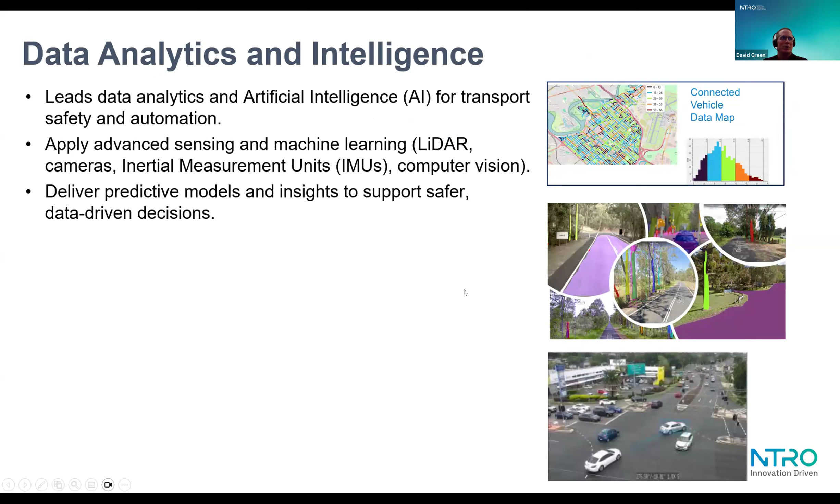We lead data analytics and artificial intelligence for transport safety and automation, applying advanced sensing and machine learning including LiDAR, cameras, inertial measurement units and computer vision, and deliver predictive models and insights to support safer data-driven decisions.

Last but not least is our rail service area. We look at ITS, level crossing technologies, accessibility, asset monitoring and intermodal terminals, and develop practices that improve performance, reduce costs and build capability. Our work spans both rail and the interface between rail and road.

That's a quick overview of our various service areas. As I mentioned earlier, we have 5 speakers today talking about various research that they've done across those service areas.

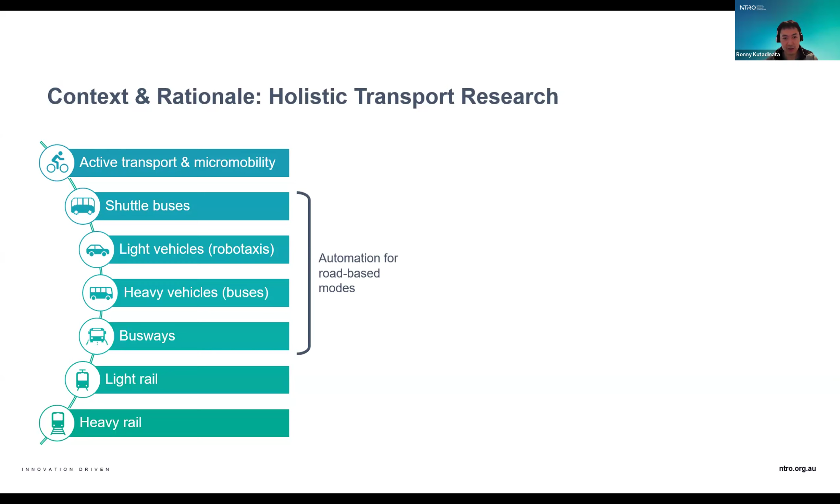We've dabbled in some of these modes, starting from the low capacity shuttles, the low speed shuttle bus, and now we're looking at buses.

In addition to automation, I personally and we as a collective have looked at individual supporting research. On the digital side, we're looking at our algorithm for on-demand transportation, and also system optimal recommendations for transportation modes, to optimize people's movements.

At the same time, we also look at the planning side, how we can achieve 20-minute neighborhoods with smarter facility placement around the area, and behavioral change projects looking at more choice and how we can influence people's behavior. The point is we integrate all these diverse technical aspects into a cohesive system for a smarter and more sustainable transport future.

Now, focusing on bus: the idea here is to improve road-based transit service. With bus services, the usual treatment is to create dedicated infrastructure, so busways.

But delivering this involves quite a bit of cost because you need to build infrastructure and deal with construction and delivery timeframes. Any delays or disruptions may put more risk into your investments, and you need the space to acquire the land or property to build it.

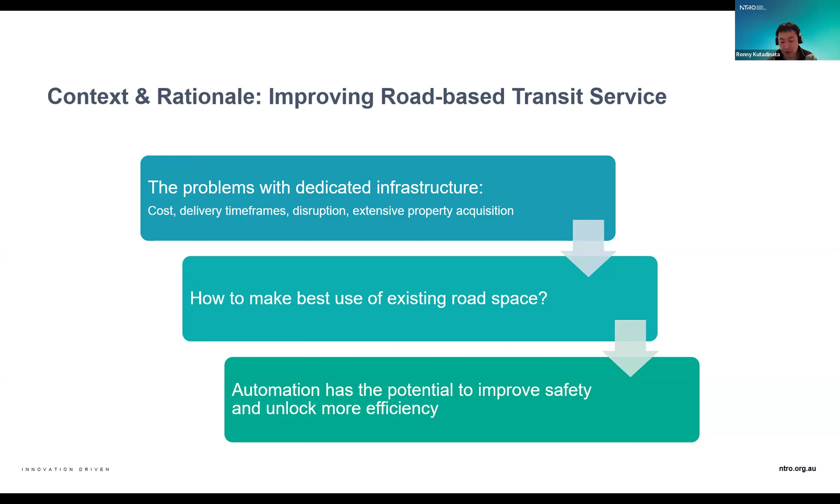To be honest, the industry people we've spoken to are at the moment more excited about the potential safety improvements from automation.

So what NTRO has done in this space is that we have done quite a bit of projects starting from 2015, where we've done some trials since then, or assisting other organizations to undertake their trials, and this is done mostly on public roads. As I've said before, we've looked at light vehicles, we've looked at the low-speed shuttle bus, we've looked at heavy vehicles like trucks, and now we're looking at buses.

We also try to look at this in different fields, in agriculture and also for defense application. Me personally and NTRO as a whole, our focus is looking at the safety plan. So usually our role is developing the safety management plan just to make sure all these trials can run safely.

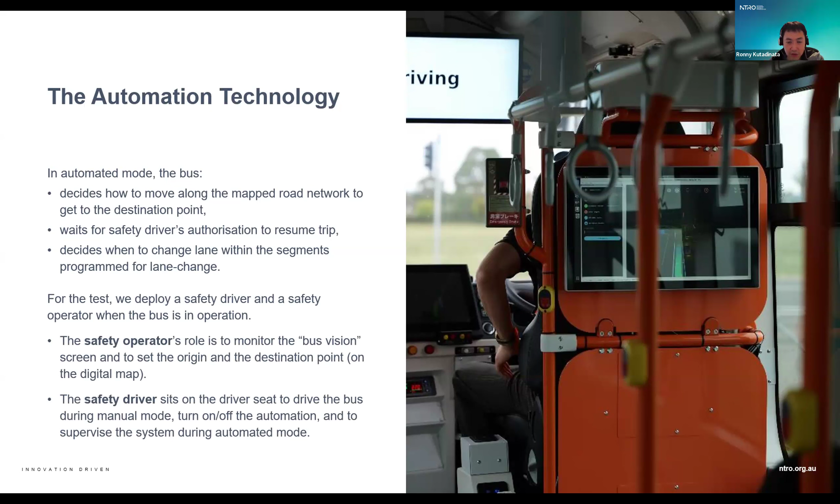Because we're essentially still under the trial phase, we actually need two personnel to operate the bus. One, a safety driver who sits in the driver's seat, and the second is the safety operator who sits just behind the driver, so they can see the display behind the driver's seat, as shown in the picture. The safety operator's role is to monitor that screen and make sure everything is going all right, and the safety driver's role is to take control if anything were to happen.

Once we brought the bus to Australia, which is quite a lengthy process in itself, we made sure the bus is ready for future testing. We brought the bus to a test track in regional New South Wales, and we've done some evaluations. There are essentially three things that we've validated. Firstly, the established test cases, which are different kinds of scenarios commonly found in Japan and Australia.

We've also done some work to introduce test cases that are quite unique to Australia. For instance, the traffic light settings are different in Japan and Australia - the bus did come from Japan - so that's why we have to do some data collection in terms of the traffic lights.

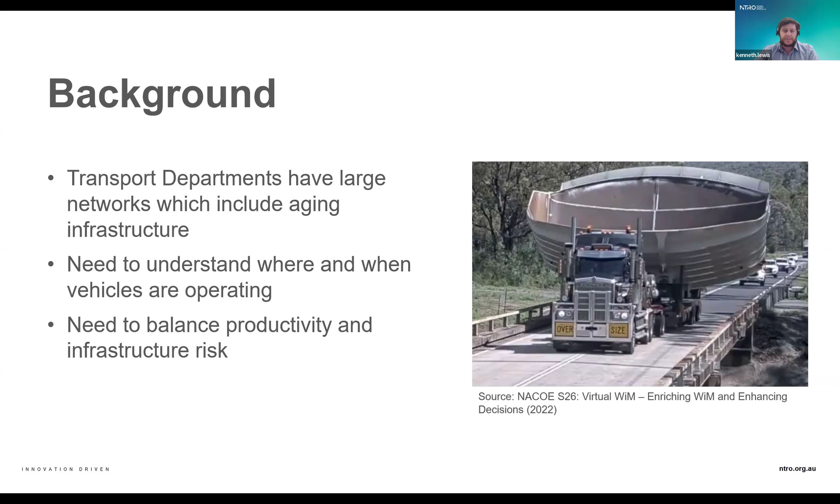Weigh-in-motion is one of the tools which is used by the transport agencies. There's obviously other technology which can be utilized, such as onboard mass and even telematics, which can provide an insight into where these vehicles are operating, but they all serve different purposes. In regards to weigh-in-motion, there's different types of sensors which can be utilized, each with their benefits and disbenefits. Some of those could be the cost of the sensors, the accuracy, the sensitivity to the natural environment. Some of these sensors which are used may be piezoelectric, piezo quartz, bending plate, or capacitive sensors.

The weigh-in-motion itself detects the axles and mass which pass over the sensor, and that can be used to allow for the identification of the number of axles, the spacing, and the associated mass of the vehicles. So this in turn helps to provide the crucial information required in planning and asset management, such as historical access, compliance, and loading of the vehicles.

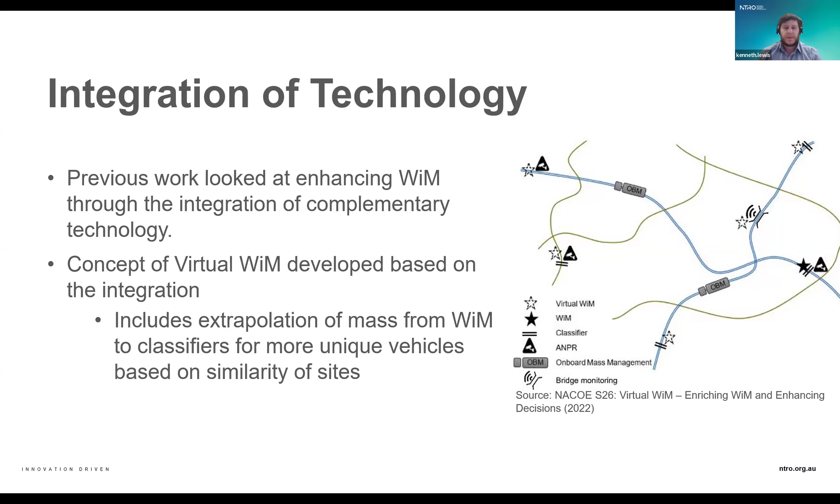Building upon this extrapolation of mass and the virtual WIM concept, another use case which was considered as part of the work was the tracking of the larger unique vehicles. The process which we used here was a bit more of a de-identified way of tracking the vehicle as opposed to, say, something like ANPR. This looked at understanding where the vehicles may have traveled, which is important as it helps to inform a better understanding of the structures which may have been crossed by these larger oversized, overmass vehicles, as that's something which the transport operators have little oversight on at the moment.

So as part of the use case, we looked at large Class 1 heavy vehicles, in particular low loaders and load platforms, as they have a relatively unique footprint which can be tracked across classifier sites. Based off these axle spacings, routing, and the time gaps between when the vehicles were logged, this helped us understand where the vehicles were potentially traveling and the routes which they were taking. So what we can see on the right side of the screen is a bit of an understanding of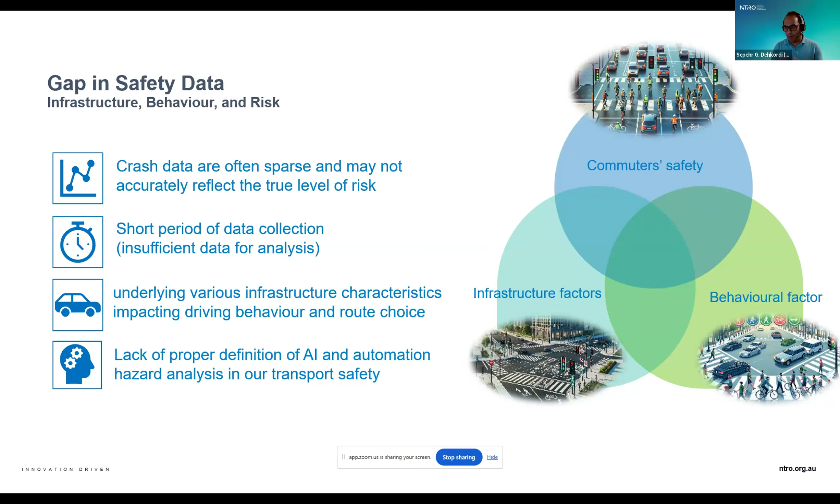And then we come up with underlying various infrastructure characteristics that can impact driving behavior and route choices that we have on our network. And let alone we talk about the application of AI and lack of proper definition of AI and automation in hazard analysis on transport safety. So when we define the new automated functionality and it provides new safety risk, how we can quantify that kind of information - at the moment, it is a kind of gap that needs to be investigated.

So we gathered infrastructure survey data, and asset intelligence is the area of work that can provide this information. We have system connectivity, the connected vehicle data, the ITS technology that can gather this information, and we have a rich digital map in different layers that can be embedded to all of this data and provide the situation where we can collate this data together. And of course other sources can come from local governments, from federal agencies, and we can add them together and create an intelligent digital model of the road network.

So if this collation is properly defined, now we have an opportunity to create different agents to work on safety, to work on the asset intelligence parts and the network operation side, and understanding more about surrogate safety measures, understanding the pattern and also behavior insights.

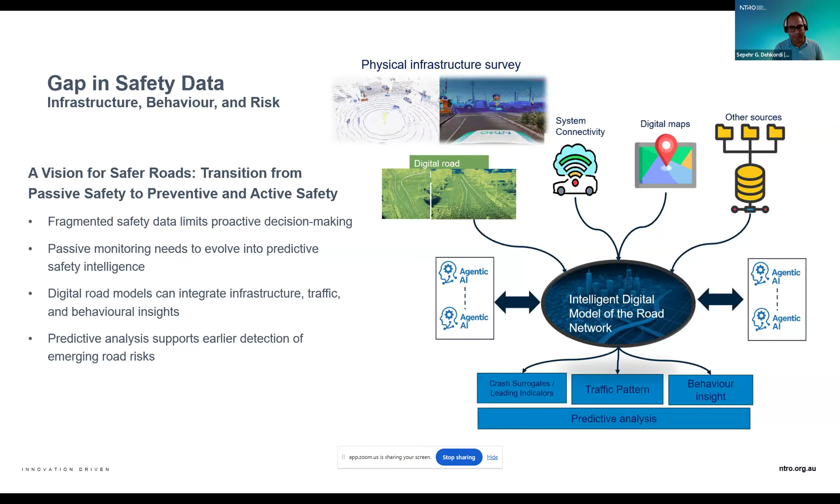I'm going to talk about a couple of use cases that I was working on and also some examples, and see what the future looks like. So the first example that I want to highlight is something between asset intelligence and asset management and also safety. We know, and the literature also shows, that the roughness of the road has impacts on safety.

However, to gather the roughness of the road, you need to have a survey vehicle going and collecting the data for you, which is the current survey that NTRO is doing with national survey vehicles, obtaining sensor level, laser level accurate roughness measures from the road network.

On another side, we talk with a connected vehicle data provider like Compass IoT, and they provide rich data in terms of connected vehicles in different locations with different market penetration. What we saw, we can overlay the 10-meter interval ground truth data from NTRO and look at the observation of vehicle type and the motion of the vehicle from the connected vehicle data like Compass IoT, and then we do the ground truthing and develop a machine learning model to understand and predict the roughness of the road with some level of accuracy.

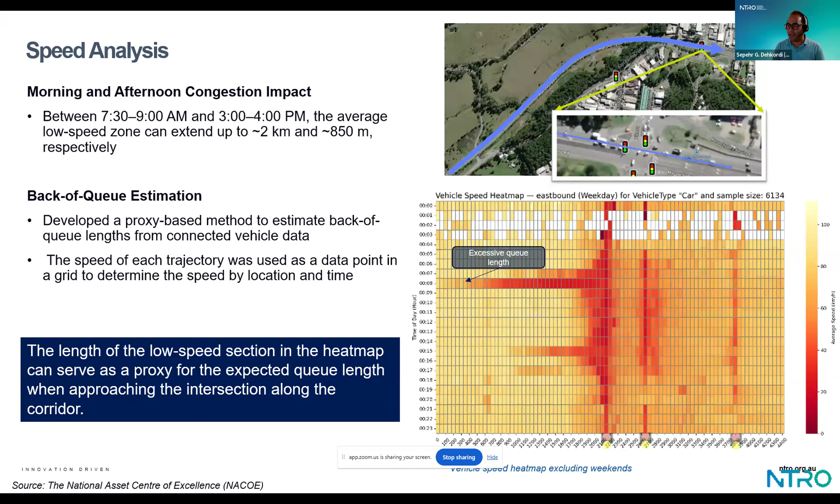So we start doing that kind of analysis, and we find you can proactively look at queue length or excessive queue length within your network and corridors, and understand a proxy-based method to estimate the back of queue using connected vehicle data. It's a proactive way because you can analyze your whole network, identify problems, and pass them to a subject matter expert who can analyze and find a solution.

Another example was in the same corridor - we looked at the connected vehicle data and the queue length to see how it looked. We found that at a specific intersection, there was a drop in speed around 50 meters after the intersection when we analyzed all the data together, and we didn't know why.

But when we split buses from private cars and other vehicles, we figured out it was because of the bus categories in our data. We looked at the map and found there was a dedicated bus stop in the data. So it's important to distinguish between vehicle type and trip purpose when doing corridor performance analysis.

Some other work we conducted, using a mostly data-driven approach and advanced analytics, was looking at automation to improve the Australian Level Crossing Assessment Model, ALCAM. At the moment ALCAM requires a manual survey, so we looked at how to change this manual survey into a digital survey.

We have a digital twin of the infrastructure and do that survey, and we saw it is very practical to do. However, there is a limitation - you need an accreditation process to understand the minimum requirement from these machine learning and AI algorithms to detect the safety parameters you have. That's a part we're currently investigating, with projects within the NTRO looking at what that accreditation pathway looks like.

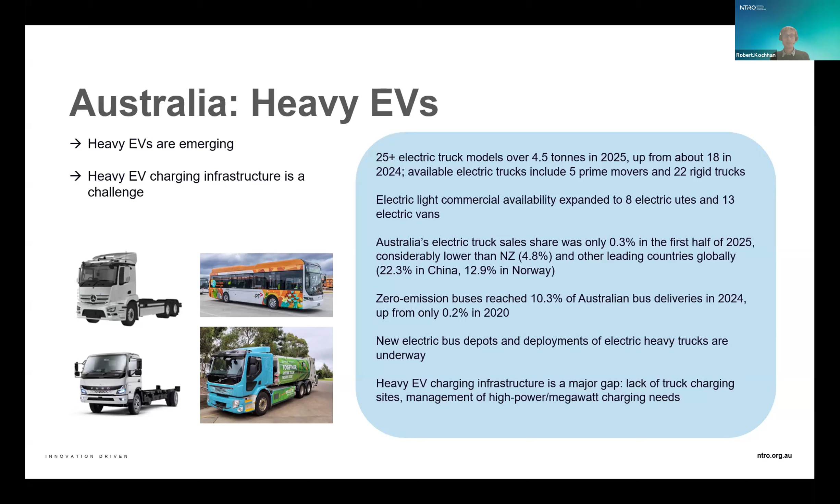So in summary, we need to keep the policy support going a bit longer. This is a recommendation from the Electric Vehicle Council, until we have about 30% electric vehicle sales penetration, to keep the momentum towards the amount of electric vehicles we need to meet emission reduction targets. Electric vehicle uptake is not yet enough to match the emission reduction pathway - there's an increase needed of 50% plus by 2030.

We need to build a national heavy vehicle charging roadmap to enable more heavy electric vehicles on the road and contribute to the emissions reduction targets, as well as more public charging and grid capacity analysis integration with the electricity grid, to make sure the high power demands for heavy electric vehicles are met and catered for.

We need to address some of the costs for heavy vehicles - upfront cost, charging, dedicated charging spaces, payload penalties, considering that heavy electric vehicles are usually heavier than comparative petrol or diesel variants. That needs to be considered as well. And vehicle-to-grid or vehicle-to-infrastructure communication needs to be looked at, because these heavy vehicles have bigger batteries that can be used as energy storage devices in the future grid network.

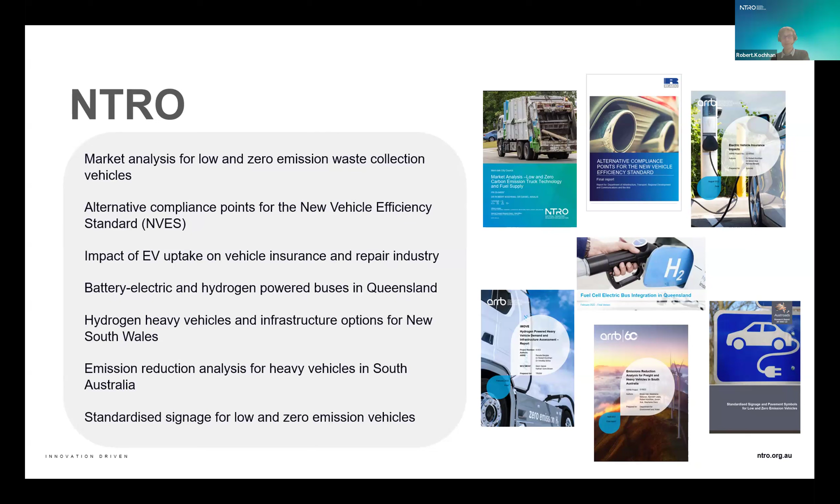So with that, I think that's enough of an overview for now. Thank you very much for listening, and back to David.

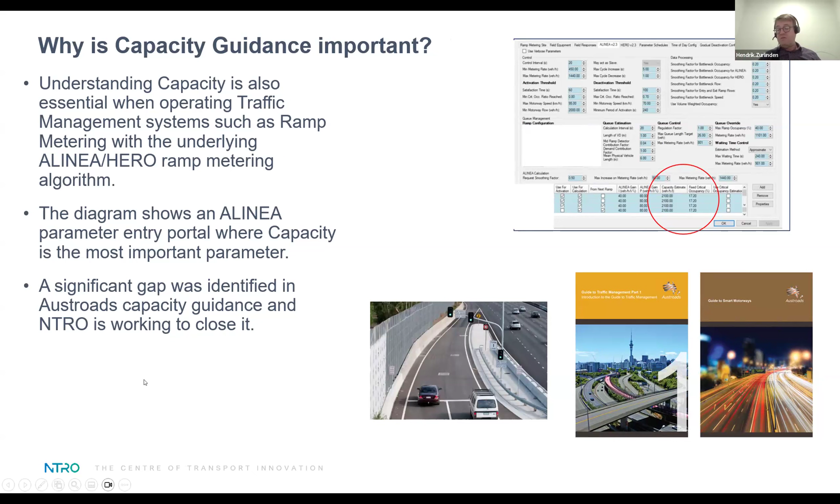So yeah, this is a bit wordy. I'm trying again not to overwhelm you. But I'm talking a little bit about the project we are working on, Austroads NEG 6527, which is the capacity update of the Austroads Guide to Traffic Management.

Current Austroads and US Highway Capacity Manual capacity values are often not sustainable. This means you can operate a motorway at a certain level for a short time, but not over an entire peak period, which may be 3 hours. Another weakness in the US Highway Capacity Manual is that it assumes per lane capacity is always the same, no matter if you have a 3-lane or an 8-lane freeway.

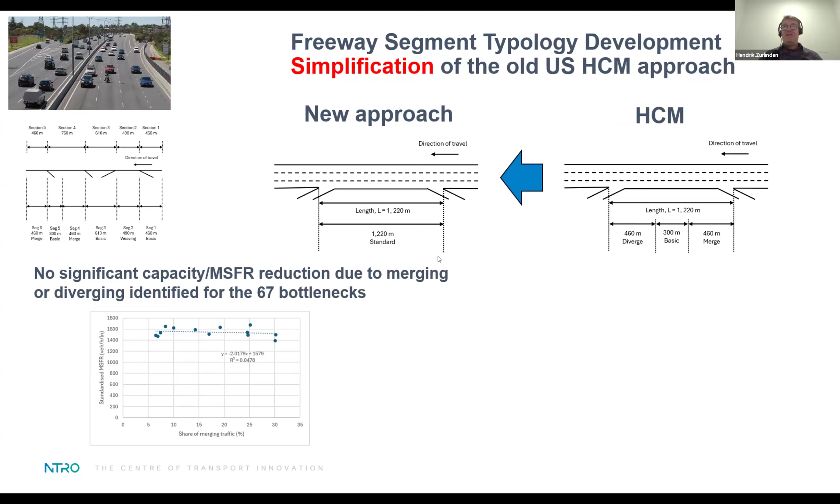What we've given them already is for a multitude of different conditions, such as smart motorways, which have higher capacity, versus unmanaged motorways. Smart motorways are characterized by ramp metering, extended ramp metering. So we've provided capacity guidance for smart versus unmanaged motorways, for different gradients, because steeper roads have lower capacity, and for different heavy vehicle percentages, because the more trucks you have, the lower the capacity is. In short, for all these combinations, we've provided flow breakdown risk curves where at a certain flow rate, you have a certain flow breakdown risk.

So this is one project, and what we have identified, as I've shown earlier, is that weaving areas are a really interesting segment type, where you have strong crossing traffic streams, and this produces lower capacity. But there was a clear gap in the US Highway Capacity Manual methodology for assessing weaving areas - many people have commented the results are all over the place, and there's nothing better in the Austroads guide.

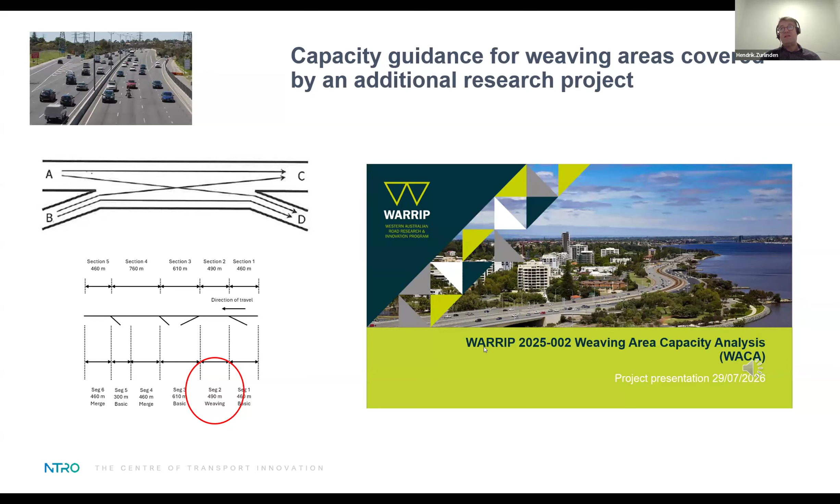That's why I've also worked on this WARRIP project, weaving area capacity analysis. I'm briefly going to talk about what we have done. We have investigated 12 weaving areas with strong crossing streams in Western Australia and Victoria, for example on the Kwinana-Mitchell freeways. We have measured speed, volume, and occupancy, which is routinely measured by in-pavement detectors, to come up with capacity curves or flow breakdown risk curves.

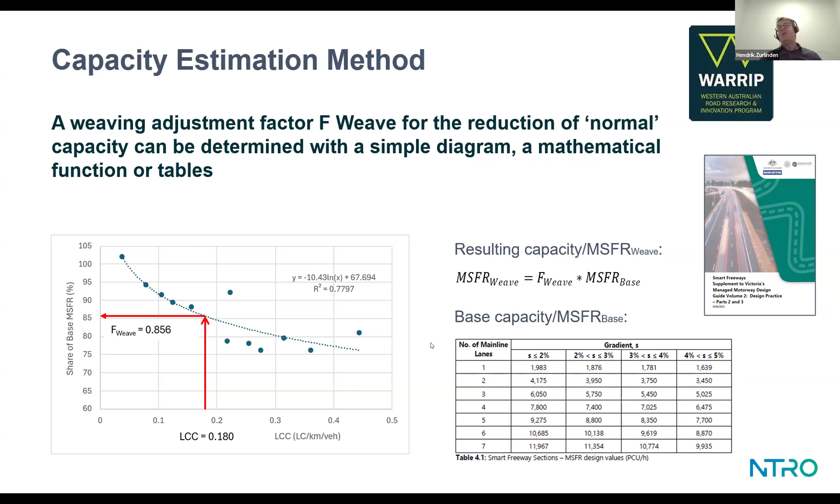So a very simple methodology, we believe quite robust. When you want to apply it, you simply take the estimated lane changing concentration, go into that curve, define a weaving factor, and then multiply that weaving factor by the base capacity.

Can probably skip that. So this WARRIP project feeds very nicely into the Austroads project we are doing, and we can then use it in the end to provide updated guidance for the Austroads guide to traffic management. That's what we are working on. We have developed that for Western Australia and Victoria, but we are currently also applying the new methodology to Queensland weaving areas and New Zealand weaving areas.

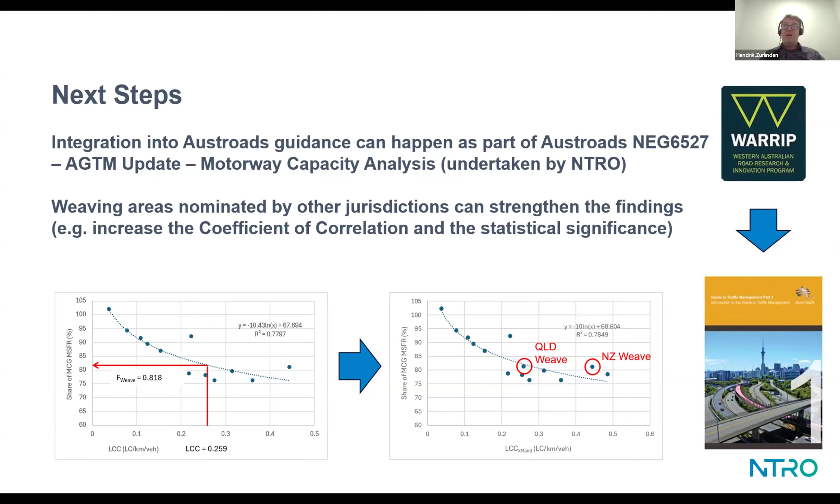So yeah, that is already the end of the presentation. There's obviously a lot more I could talk about, including all the technical details. But this was really meant to show you that we are also working on these more classical things, than the nice things like automated vehicles and so on, artificial intelligence, electric vehicles, and so on. Thank you.